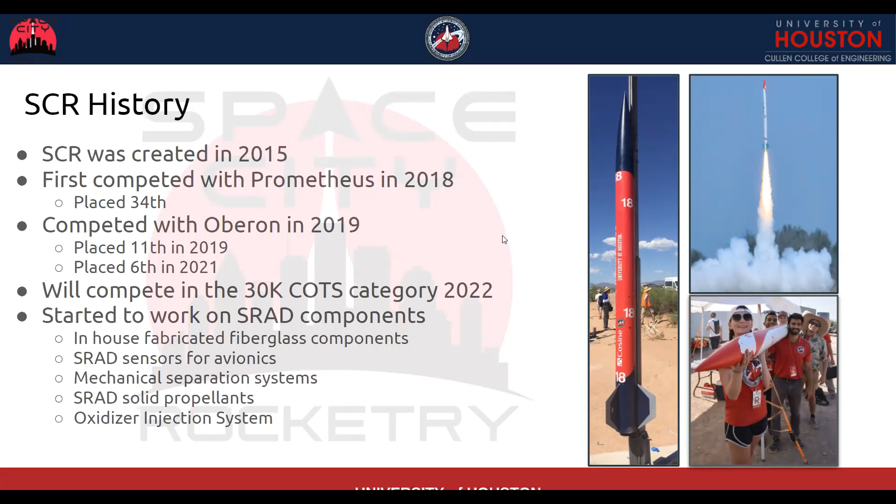Now let's move on to what the presentation is today and the things we want to achieve. First, we want to get feedback and approval from advisors like Randy and other alumni joining, to make sure we are on the right path to launch this June at Spaceport America Cup. We also want to showcase all the work and new implementations the team has had this year. There's been a lot of changes, a lot of things we've done this year that we've never done before, so we want to present that to you.

Once you see everything we've done, we want to provide some insight into where the team wants to head in the next few years and what we can accomplish, and also gain more support and expand awareness of the engineering excellence that the team provides at the University of Houston.

One thing I do want to mention is that for today, we were expecting the rocket to be around 90 to 95% completed. However, because of finals, because of many of us graduating, our report, and just the ambition of pursuing 30K in just one year, there are some notable things that have not yet been manufactured. But we do have a plan to finish them within the next week, and we'll be talking more about that.

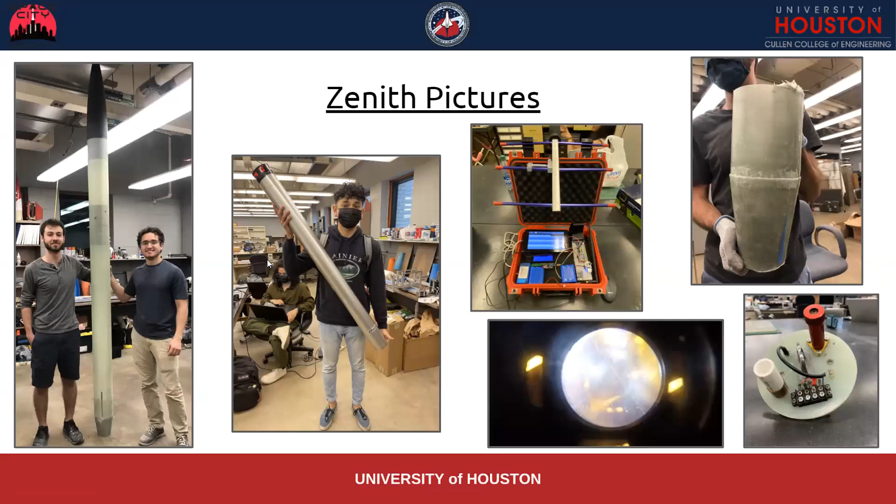And then, as you can see here, we have Zenith right now. We have already sent Zenith to IA Coatings, who are going to be doing our paint design, which you can see on this side right here. This is how we'll be looking. This is the O3400, and then you can see other components of Zenith.

I just wanted to point out that at the beginning of the year, we did not start up with a lot of money. A lot of it came out throughout the whole process of fundraising throughout the whole year. However, we have managed to stay under budget, and as you can see, some of the money we will be saving for next year.

We have this - how much Zenith is expected to cost, $5,400. Competition is going to be around $4,000. And we do, as I said, plan to save more for next year.

But okay, it is time now to go through each sub-team and be able to learn more about Zenith and everything we've done. So take it over, Ravi. Cool. Can everyone hear me okay?

We good there? Mm-hmm.

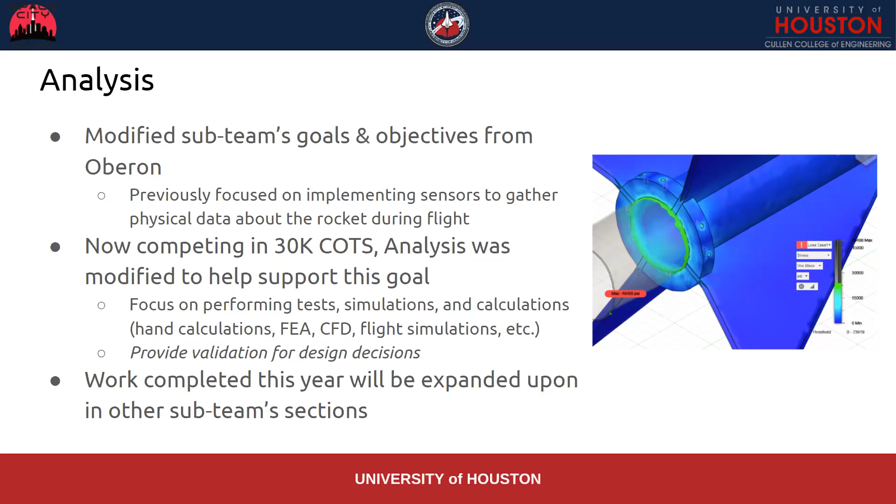So the work we've completed this year will be expanded upon in other subteam sections. I'll be checking in throughout the presentation to highlight what we've completed.

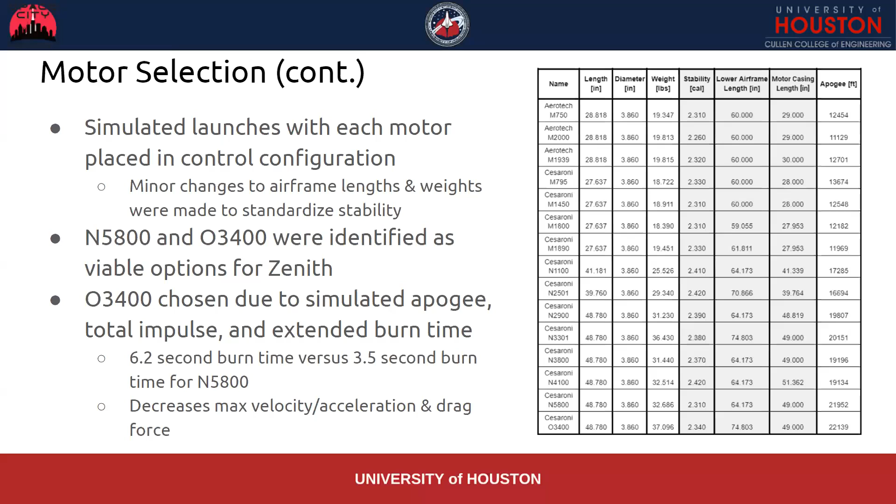And this is the Cesaroni O3400. You can see some of its dimensions here and the thrust curve. As mentioned, that burn time of 6.2 seconds is definitely one of the main reasons why we decided to go with this, and also its total impulse of 21,000.

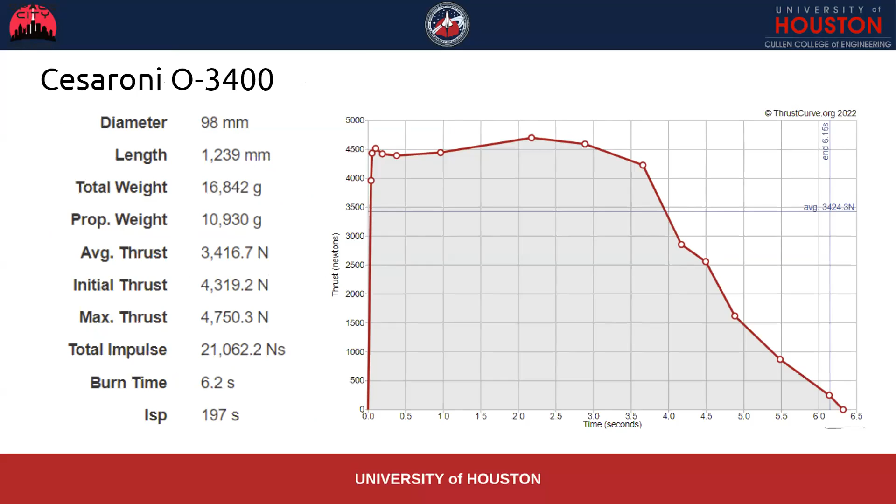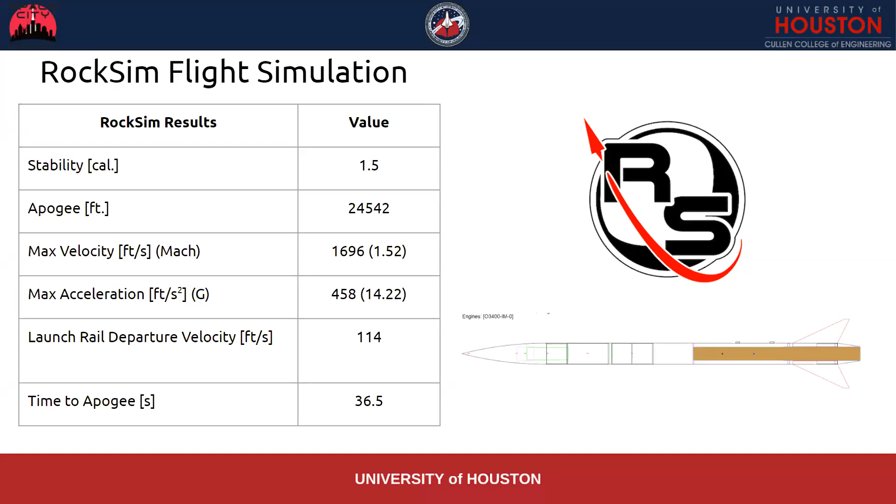Now, we also employed the use of RockSim to get some more comparable values and not solely rely on OpenRocket. The stability stayed the same at 1.5, along with its mass of 78.7 pounds. We did notice that the simulated apogee was projected to be a bit lower, around 24,500 feet. The max velocity and max acceleration were comparable, although a little lower for velocity and a little higher for acceleration. The launch rail departure velocity is still above 100 feet per second per IREC guidelines, and the time to apogee is 36.5 seconds.

So here you can see the propulsion risk, and you can see that everything is either in the yellow or the green, which means that it's all clear. We have our negligible and improbable thing being that the motor assembly is taking more time due to it being O-class. We're not actually assembling the motor ourselves since it's O-class.

We can't work on it, so I'll put that as improbable because we're not really the ones assembling that. The only seldom risk we really have is the igniter, so it's either an incorrect insertion of the igniter, which can be easily fixed, or failure to ignite the motor on the first try, which we can go again.

So the most improbable thing would be Zenith reaching Mach 3, which would have some potential deviating or unfamiliar behavior. But as you could tell from the last slide, it only goes to, I think, 1.6 Mach whenever you looked at the simulations. Also, I'd like to give credit to Ravi and Tala for all the motor selection stuff.

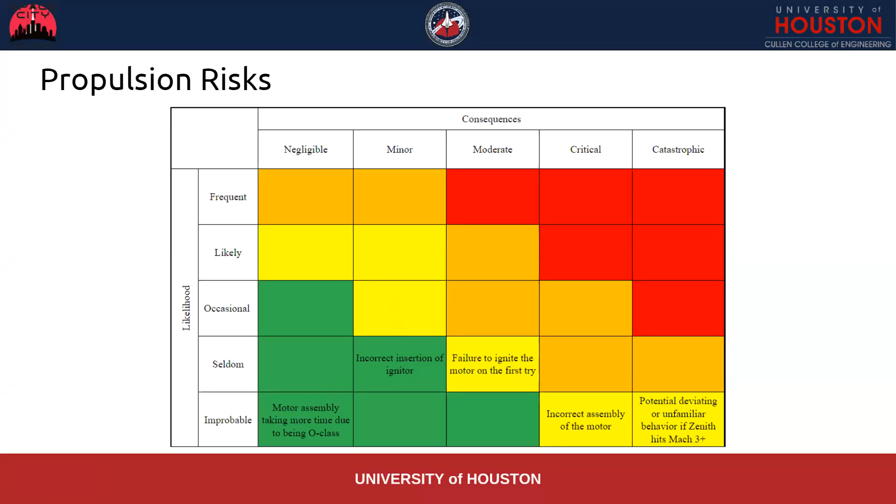They worked really hard on that during last semester. One thing I want to point out too is that for the motor assembly, something we used to do was assemble our own motor with solid propellant. However, because of the new regulations from IREC, we can no longer do that ourselves. We opted to have the company Cesaroni assemble it for us at competition.

Now it is structures. Hi everyone, my name's Haley. I'm about to be a senior in mechanical engineering, so I'll still be here next year.

Just starting off strong with the nose cone. We went with a 4-to-1 tangent ogive. The main things we considered while doing this through a trade study at the beginning of the year were the drag calculations that Analysis so graciously did for us, the price of the component, and its actual availability. We considered a lot of different options, but there were only a few that were commercially available since we weren't looking into creating our own nose cone just yet.

And this one just had comparable prices and availability to the other commercial ones. So the main difference here was the drag calculations, which I will let Ravi cover on the next slide.

Thank you, Haley. So as she mentioned, Analysis performed the analytical component of the trade study, which we determined to be a drag force data analysis, once again utilizing OpenRocket. We considered 7 total different nose cone profiles.

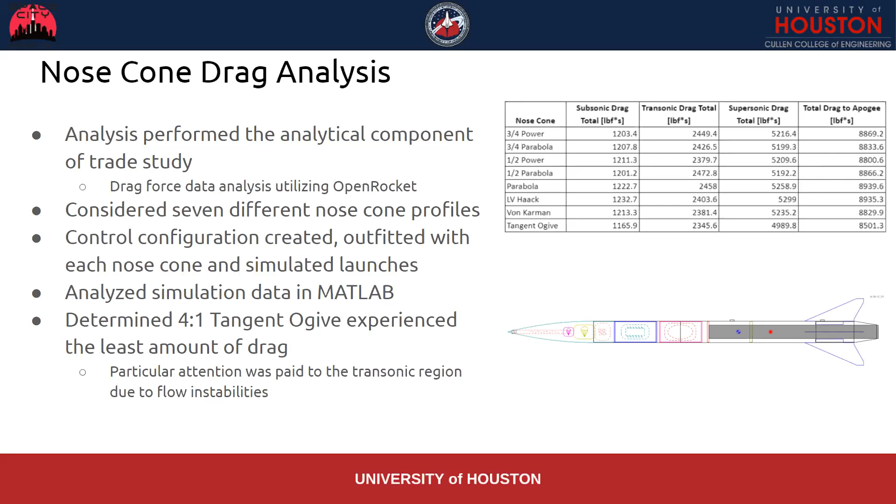So similar to the motor simulations, we created a control configuration, this time much later in the design process, so we were able to get a clearer representation of what Zenith is like today. But we outfitted each of these control configs with a different nose cone and then simulated their launch.

Instead of just comparing apogee as we did with the motors, we were able to analyze the simulation data from OpenRocket in MATLAB, and we were able to obtain drag values for each nose cone experienced in the subsonic, transonic, and supersonic regions, as well as accumulating all of the total drag to apogee.

I do want to note that particular attention was paid to the transonic region due to flow instabilities, and that led us to determining the 4-to-1 tangent ogive to be the nose cone profile best fit for Zenith.

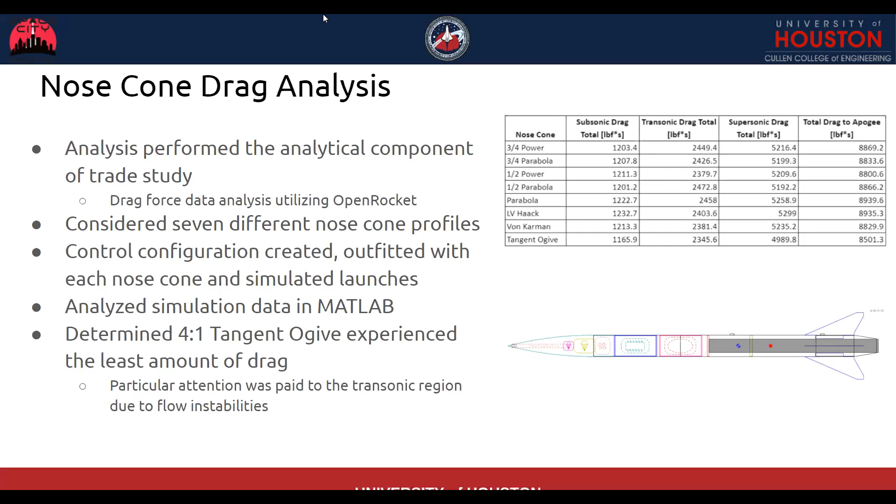So as far as the airframes and couplers, after playing around with different OpenRocket simulations, we decided to shorten the upper airframe that we had originally purchased. That was shortened down to 25 inches. This just allowed the payload and the avionics bay to sit in a preferable area in terms of distance from the motor, so we could hopefully play with our stability a little more.

And then as far as the— can y'all hear me now? Yeah, we can hear you. Sorry, my mic's honestly pretty bad, so let me know if I end up going out again.

So as far as the airframes go, the upper airframe was shortened just to make the payload and avionics bay closer to the motor, just so that would help our stability a bit more.

The avionics bay is above the payload bay just because the recovery system is kept in the nose cone. So it's preferable to have the avionics system be directly in contact with that, as opposed to going through the payload bay if it were to be in between them. So that was a determination for that.

The bays were both used in Oberon, so they did have previous holes in them. We decided to patch all the holes in the avionics bay just to strengthen it up a little bit. We used some reinforced epoxy for that, and we also did an inner layup to add some even more strength to it. Then we added some flange nuts on the backs of all of them, just so the epoxy would have something to grab on.

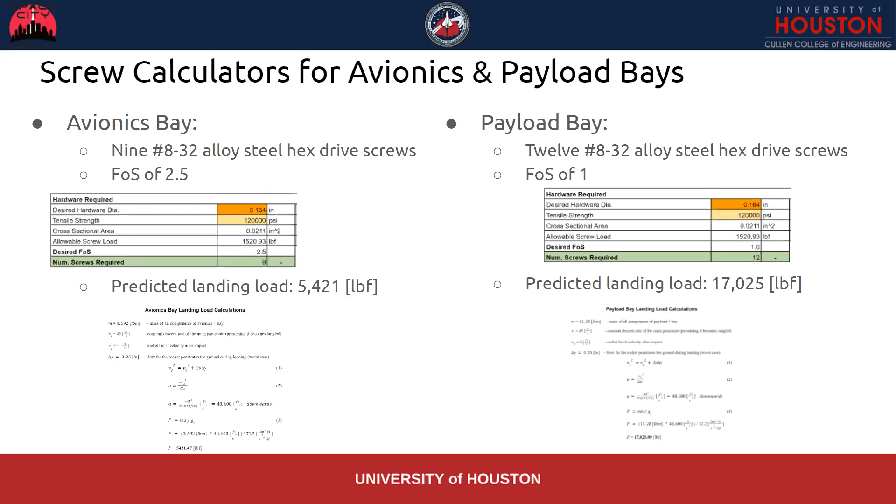The motor block was an addition we made this year since we are securing the motor from the top, as opposed to securing it at the bottom the way Oberon was done. Essentially we'll have this motor block sitting above the motor, screwing in with a countersunk screw into the top of it, and it will be secured with 6 6-32 screws.

It was determined that we wanted to go with aluminum 6061 T6. Shout out to Eason for machining that for us. During machining, it did turn out that we had an issue with tapping one of the screw holes. That one's actually an 8-32 screw, but it is still usable.

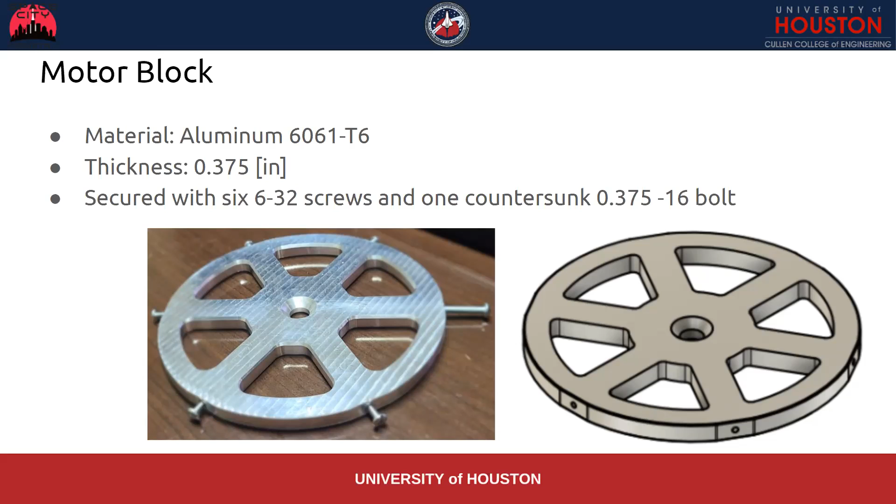And the design was also created by Eason, and it was manufactured earlier in January.

The boat tail has been one of our big proud moments for structures this year. Originally we were thinking that we were not going to get very high on apogee, and so we were trying to find new solutions. So for the boat tail, we ended up playing around with different things that we could do to improve apogee because we were worried we weren't going to get very high. This ended up adding a lot for us.

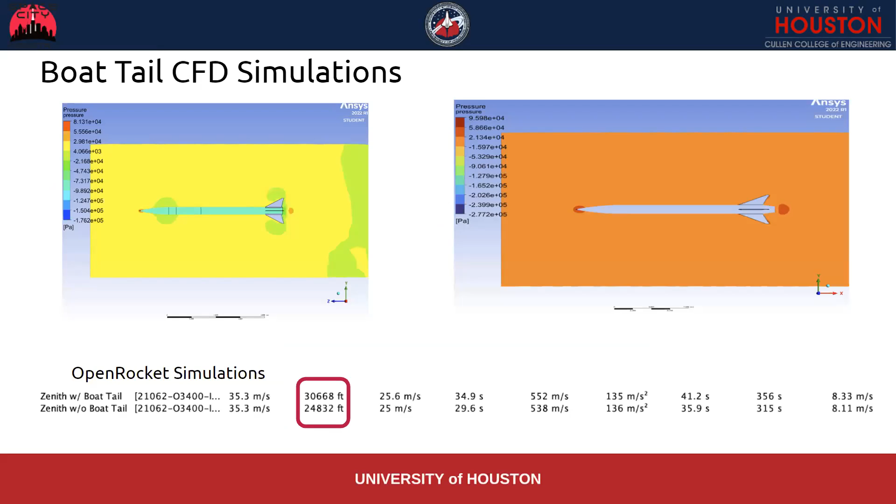So this is just kind of verification of the improvement that we got from Zenith with and without the boat tail, as you can see. This was just validation for the previous apogee and the current now estimated.

So I just wanted to talk a little bit about the boat tail process, just to discuss some of the things that we discovered.

We tried out different methods of securing and tried to find sources online. We determined that PVA and mold release were the best forms to actually work with. We ended up using 3D prints, two half prints. For the lip, we ended up using reinforced epoxy with graphene and chopped fibers to try and get a really clean lip on there. And then we just layered over with fiberglass sheets on top of that.

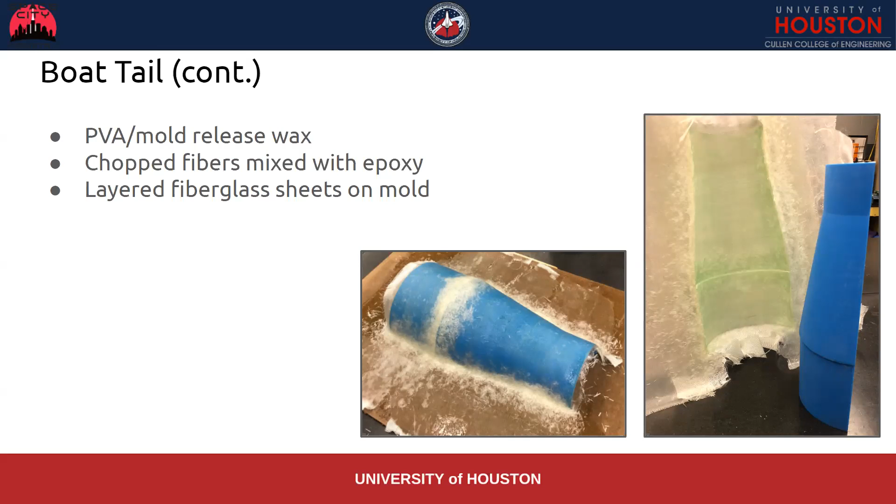By doing that, we ended up producing these two lovely negatives right here. We actually ended up having to do this process twice just so we could perfect it, whether a heat gun helped, or how many layers we needed to make it strong enough. Once we had these two negatives, we were able to do the same process of doing the chopped fibers along the lip, as well as doing the inner layup after we had used the molds, screwing into the sides to keep them aligned, so we didn't have an issue with the lip not lining up for both of them.

Another thing we are working on is the MLA. We have all of the parts for this, but it has not been assembled yet. As far as the layup process, it's going to be the exact same as the boat tail process, so we're very confident we can get it done effectively in one try, especially since carbon fiber is a much more expensive material.

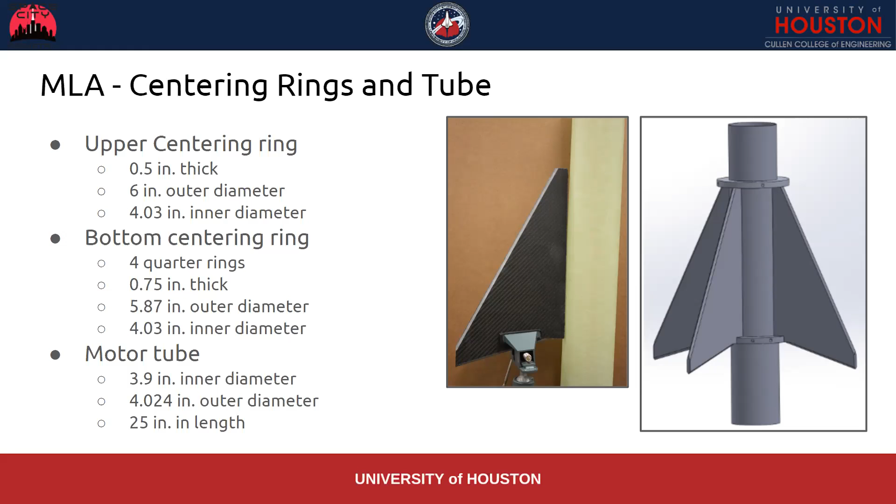Analysis was also employed using a screw calculator to determine how many screws will be necessary for the modular lower assembly. In the end, we determined we need a total of 12 1/4 inch-20 alloy steel hex drive screws. We also determined that 8 screws should be placed on the lower centering ring, which is divided into 4 quarters, and 4 screws used on the upper centering ring. This was determined with a factor of safety of 1.41, and the predicted landing load was made with the same assumptions as the avionics and payload bays.

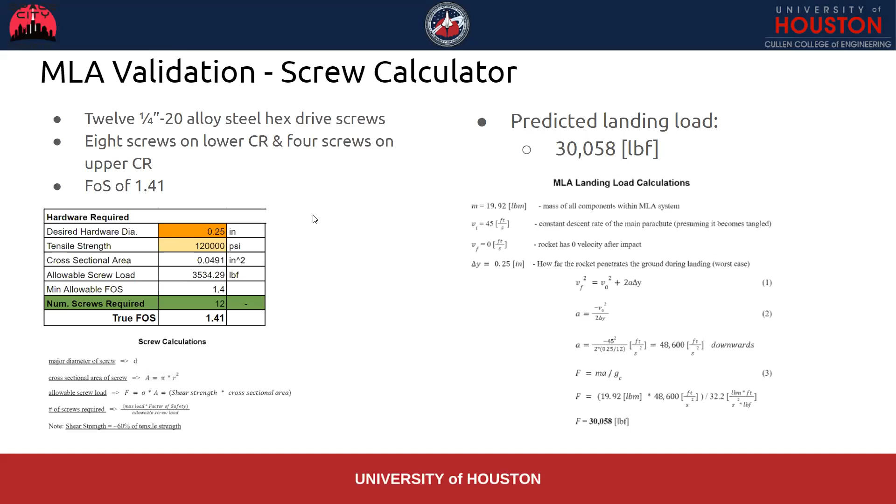Something I forgot to mention is that we assumed a worst case scenario, as if Zenith was landing like a pencil straight down. Since the MLA will be the first point of contact if that scenario happens, that gives us this extremely large predicted landing load of 30,000 pounds force. But these 12 screws, according to our screw calculator, will be able to hold up against those projected forces.

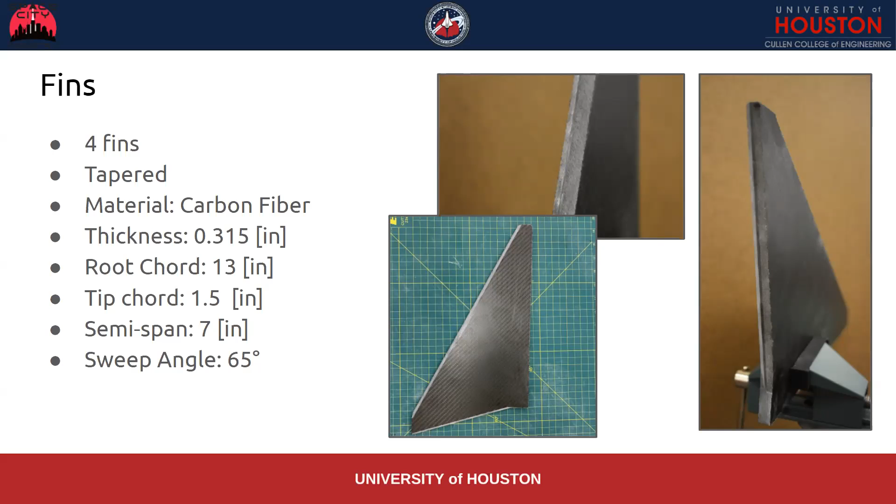We also went with a tapered edge to help us with the drag. There was an issue during machining with one of the tapered edges, so we've been working on cleaning that up using some chopped fibers and epoxy, trying to get a straight edge so we can get a comparable match with the other fins. These will also be attached - that straight line on the edge will also be attached to the MLA.

As important as ever, we wanted to make sure our fins would not flutter or diverge. To do this, we utilized the program AeroFinSim for these calculations. Instead of assuming the regular carbon fiber input it has listed as a material on the program, we were able to gather material properties of the carbon fiber from the vendor and use those for a much more accurate representation.

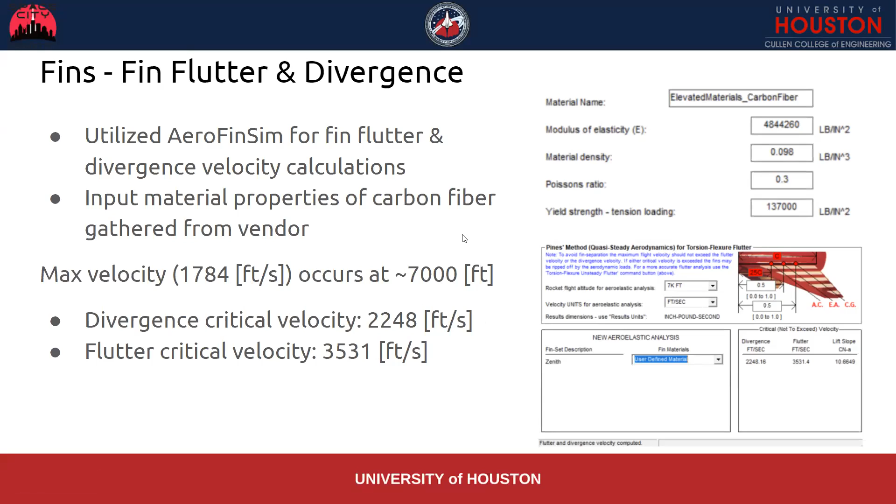I want to note that our max velocity of Zenith is projected to be around 1,784 feet per second, occurring at roughly 7,000 feet. This is in line with the critical velocities for both divergence and flutter, which are listed at around 2,200 and 3,500 feet per second. So we are clear on those with the fins.

As far as risks, part of the main concern was the actual landing forces, but also the forces experienced during flight. Right now our most critical concerns would be failure of the rail buttons, the motor block, or fin flutter or divergence. Failure of rail buttons coming off the pad would be very dangerous, as we would have no real direction or control of the direction.

If the motor block fails, we have an entire motor falling out the back of the rocket - probably not ideal. Fin flutter and divergence, as Robbie was saying, is a very critical point and can completely mess with the direction, the apogee, really anything about the flight.

Something we considered critical but also improbable was fastener hardware failure or improperly mounted fins. This isn't an assumption that the fin is going to fly off the rocket, but instead an assumption that maybe they are epoxied too crooked, in which case it may cause some sort of spin or mess with the flight.

For fastener hardware failure, that also applies more so to the landing forces, and that's where we're expecting to see the most forces. So the hope is that it would still be reflyable after, and that it would be something critical but not completely catastrophic.

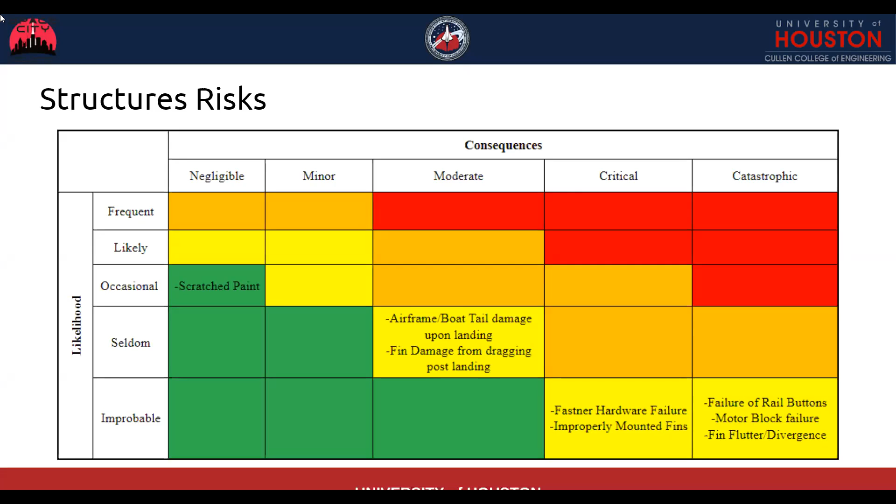Thank you, Haley. One thing I want to clarify is you might be asking why we don't have a thrust plate. The MLA serves as our thrust plate this year, taking on all the load from the motor. The reason is we weren't comfortable having a thrust plate in our boat tail, which we just started working on this year, taking all that load. That's why we went above and beyond on choosing screw size, the thickness of the MLA, and so on. If you have more questions, we'll answer them after the presentation. But now let's move on to payload.

Hi everyone, I'm Isabel. I'm a junior majoring in biology and environmental science, and I'm your payload lead. Our overall objective of Zenith's payload is to observe how accelerative and gravitational forces, as well as the pressures of spaceflight, affect E. coli and their reproductive behaviors.

We're trying to answer two major questions: how do the pressures and accelerative forces of spaceflight affect the reproduction and growth of E. coli? Our null hypothesis, the expected hypothesis within the scientific method, is the opposite of what we're asking: the internal pressures throughout Zenith's launch will not affect the reproductive behaviors. Our alternative hypothesis, which we are trying to figure out, is that the internal pressures throughout Zenith's launch will affect the reproductive behaviors of E. coli. These hypotheses are important, as we'll analyze them later when we get our results.

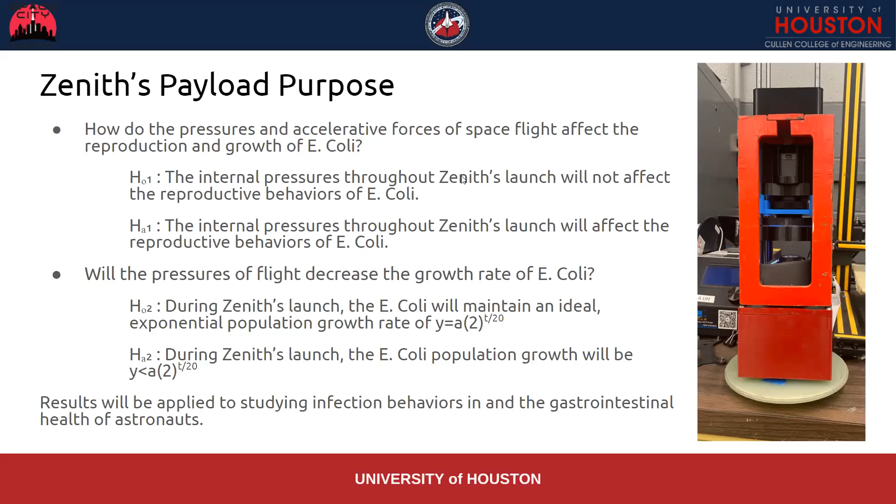Our second question is, will the pressures of flight decrease the growth rate of E. coli? Our null hypothesis states that during Zenith's launch, the E. coli will maintain an ideal exponential population growth rate of y equals A times 2 to the power of t over 20, which I calculated because E. coli doubles every 20 minutes. So 2 is our growth rate, and time in minutes is divided by 20 — we can also convert that to seconds if needed — and A is the initial amount of E. coli we start with. Our alternative hypothesis is that the population growth would be less than that, as it would decrease due to pressures. Our results will be applied to studying infection behaviors and the gastrointestinal health of astronauts, as E. coli is found in the intestines, which I'll elaborate on in the next slide.

So E. coli stands for Escherichia coli. There are different classes of it; however, the two main ones we looked at when choosing a strain were commensal E. coli and UPEC, which is uropathogenic. Uropathogenic causes a lot of common infections within humans. So although we're using commensal E. coli, the more harmless one, in case of bacterial contamination there are no major infections caused.

If this strain theoretically were to mate with other strains, that would cause infections, so we would be able to see how the bad E. coli can cause incubation periods with changes in pressure during spaceflight. And we would also see how commensal E. coli grows and takes up resources within the gut microbiome as the pressures change.

It reproduces at fast rates — like I said, it doubles every 20 minutes during the exponential phase. The chart on the right is an averaged growth curve of all bacteria, and it's pretty accurate to E. coli. There's a lag phase for the first hour and a half, then a few hours of the exponential phase, and then the stationary phase, when growth dies off because they take up too many resources to grow further. That protects us from other bacteria trying to cause infections. It's also not oxygen dependent and is temperature resistant.

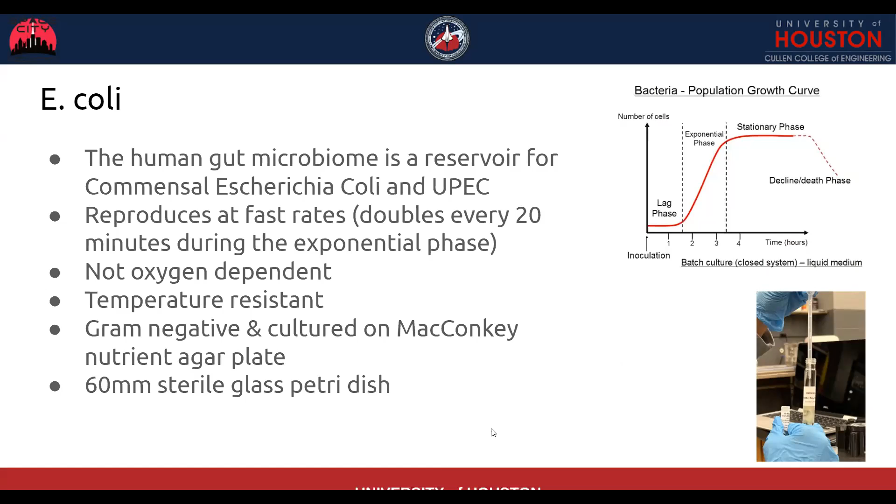For our camera, we're using the GoPro Hero 5 Session. Our ideal recording is 1080p at 60 frames per second. The sensor size is 1/2.3 inches, and the aperture is f/2.8.

Our main concern with the GoPro was overheating. As it overheats, it could die faster, it could skip around, it could crash. To mitigate that, we have a power bank that'll be hooked up to give extra battery life, and then heat mitigation, which will be explained in our cooling system later.

When it comes to our magnification system, we mimic a traditional microscope model. So we stack the lenses at certain apertures, focal points, and measure the refractions of everything. We do a 10 times magnification macro lens with a 40 times magnifying glass to reach 400 times magnification.

The way it's set up is our light source is on the bottom, then our Petri dish, and the light source goes to the Petri dish, and then the lenses are stacked and the camera sees through those. Our light source beneath the Petri dish is at an angle giving alpha equals 30 degrees, which will be used in the numerical aperture of the lenses. In the next slide, I'll elaborate more.

The numerical aperture of our bottom lens can be calculated by doing n times the sine of alpha. The sine of alpha would be 1/2. And n, our refractive index of agarose, was measured by taking the sugar and salt contents and measuring the percentage of that against the water in our agarose, which gives us n equals 1.335. We multiply that by 1/2, and that gives us our numerical aperture of our bottom lens, which is 0.6675.

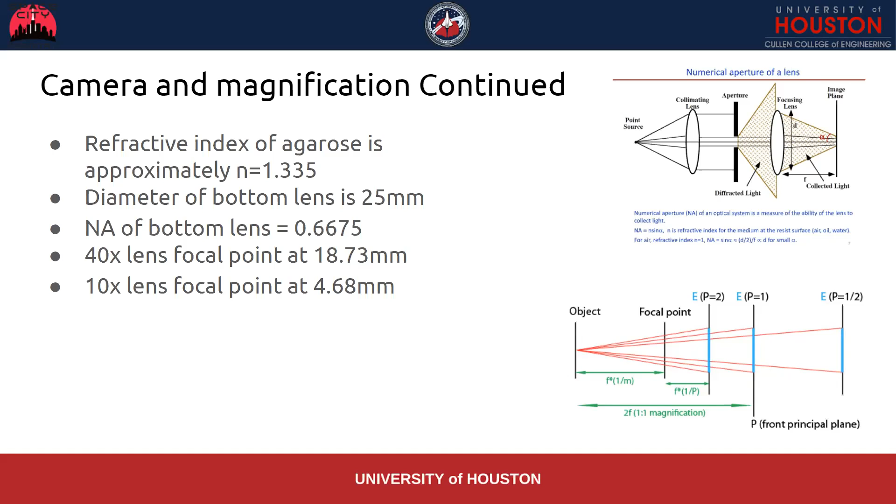As it states, the numerical aperture is equal to the diameter of the bottom lens divided by 2, divided by our focal length at the bottom. The diameter of the lens is 25 millimeters, which comes down to 12.5. We use that to figure out the focal point of the 40 times lens at the bottom, which is 18.73. Then the second figure on the right shows how we proportion that to get our 10 times focal length of 4.68 millimeters. That's how we will stack the lenses at those distances.

For our structural components, we have the CubeSat of 10 centimeters, 10 centimeters, 10 centimeters, 30 centimeters. It'll weigh 8.8 pounds. We have our ballast, and our stabilizers, which are rubber washers and rubber grommets between a lot of our hard equipment, and then foam to dampen more vibrations.

We have our steel frame. The steel gives structural integrity and dissipates heat from the inside, acting as a heat sink to further take away heat from the GoPro. Then we have our 4 zinc rods that are 1/4 by 20 that run through the payload bay that everything is secured on. And then our headlamp sits at the bottom.

Within the steel frame lies the spacers that are cut to the focal lengths that we wanted. And then our mounts holding all the components, we refer to this as the internal frame. The mounts and spacers are printed out of standard PLA.

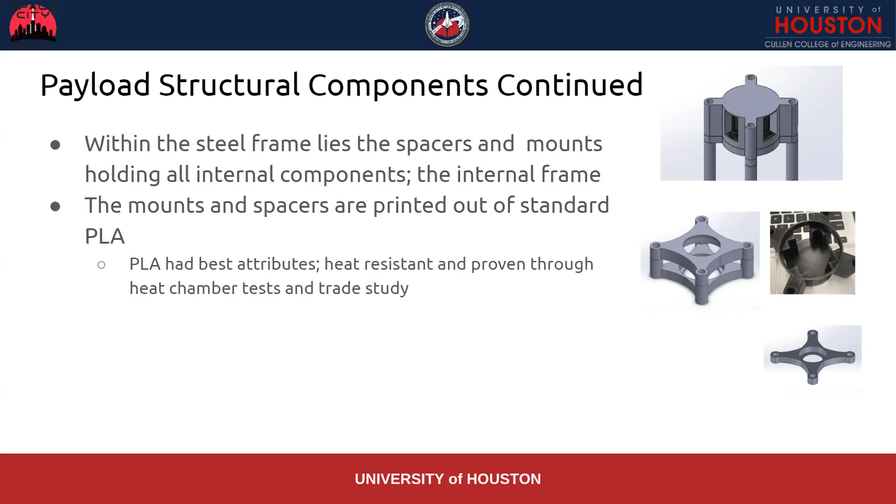There was cause for concern that the heat could mess with the structural integrity of our mounts. However, after doing a trade study on 5 other 3D printing filaments and a series of heat chamber tests that went up to 200 degrees Fahrenheit, we concluded that PLA had the best attributes and was the most available. It's only going to get up to like 115 at the most extreme in New Mexico, so we should be okay.

For our payload cooling system, our purpose was to prevent overheating of the camera and the power bank. So what we're doing is taking instant ice packs, which is ammonium nitrate and purified water. When that salt is dissolved in that water, it creates an endothermic reaction, which makes it cold. It sucks in all the heat.

So it'll fit within the X's on the right. Those are each calculated to be 36.823 cubic inches.

As we tested it in the heat chamber, they could stay cold for up to 5 hours. That thermometer on the right measured it after coming out of the heat chamber for a good 30 minutes, and it was still cold.

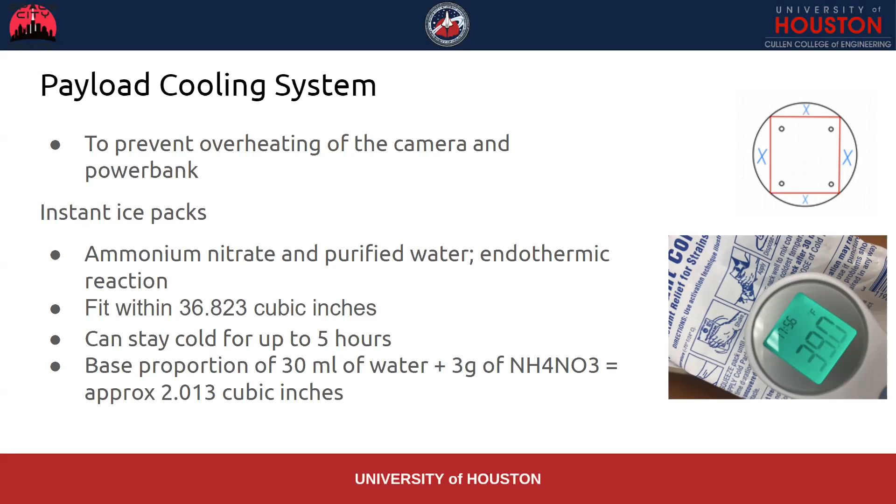I have a base proportion of 30 milliliters of water plus 3 grams of ammonium nitrate, and that approximates about 2 cubic inches, and we can mess with that proportion to create stronger solutions, and then also to fill in the other cubic inches. We also have space above the payload frame to add an extra cooler to keep the GoPro cold. And as the solution is shaken more and mixed, it will become colder, so the vibrations within the rocket will hopefully maintain the coldness.

And then for our expected results, it's inferred that the reproductive behaviors will be affected. What we plan to do is compare the recorded footage against the pressures measured by avionics. As we calculate the surface area across each frame per cubic millimeter, we can create and simulate an observed growth curve using statistical code on RStudio.

As we do that, we will compare our observed and our expected values with a chi-square goodness of fit test. As you compare those, you'll get a p-value. If the p-value is less than our critical value chosen of 0.05, we can reject the null hypothesis, meaning that we are correct and it does affect reproductive behaviors, and it also decreases the growth curve. And if it is over 0.05, then we fail to reject that, meaning that our experiment could be inconclusive. So this is just a way to further confirm that we got accurate information.

So for our payload risks, we kind of went with anything and everything that could happen and go wrong, just because we didn't have it in the PDR. But for negligible and improbable, we had condensation over the Petri dish and the camera lens, which we will be spraying everything with hydrophobic spray as much as we can so that the condensation will dissipate from that. And if it does happen, it will not affect our data collection too much.

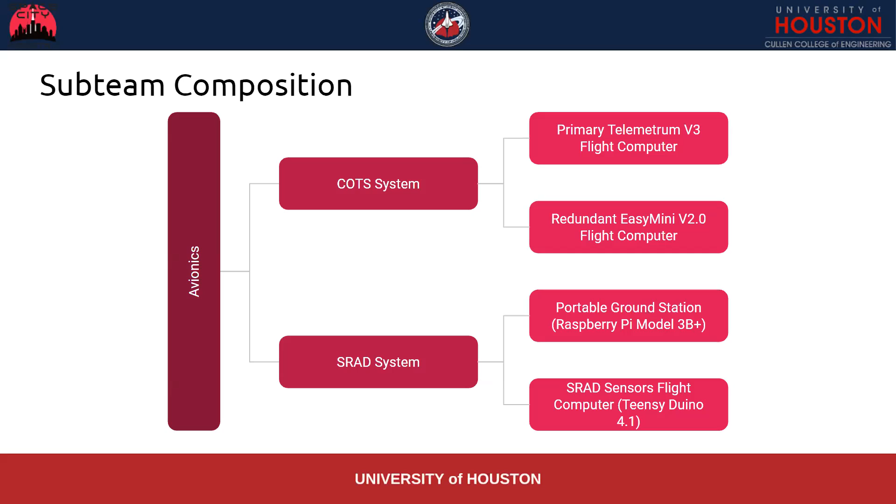So moving on to the next slide, we have COTS avionics. So first up is our COTS flight computers. Just to give a quick rundown before I go more in depth, we're employing two COTS flight computers this year for Zenith.

Our primary flight computer is a Telemetrum version 3, as I discussed earlier, in which the charges it will release on its main and apogee terminals are the tender descenders at 1,000 feet and CD3CO2 system charges at the drogue. And it has a built-in GPS sensor to track and recover the rocket, as I will talk about later. It's currently powered by a 3.7 volt, 25 milliamp per hour LiPo battery.

And as for our backup redundant flight computer, we have, as you can see here on the right, the EasyMini version 2.0. It currently ignites the black powder charges as a backup charge to ignite at apogee with a 1-second delay. It also releases tender descenders at around 800 feet, as I'll discuss later why we chose that altitude.

It's also powered by a 3.7 volt, 25 milliamp per hour LiPo battery, and both flight computers have general sensor data. So they output pressure, altitude, temperature, speed, velocity, and acceleration data.

So on the next slide, to go into more depth into our primary flight computer, it's a Telemetrum V3.0. It has dual deployment support with microsensors, so it has onboard non-volatile memory.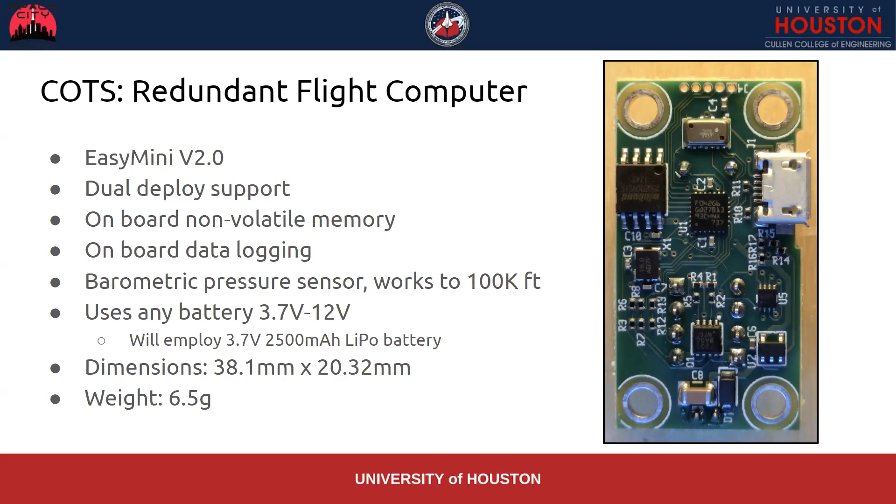On the next slide, you can see on the left our wiring schematics, showing how exactly we connect our charges to the E-matches, how we connect it to the terminal blocks, and eventually to our pigtail connectors. On the right is our almost finished full avionics tray.

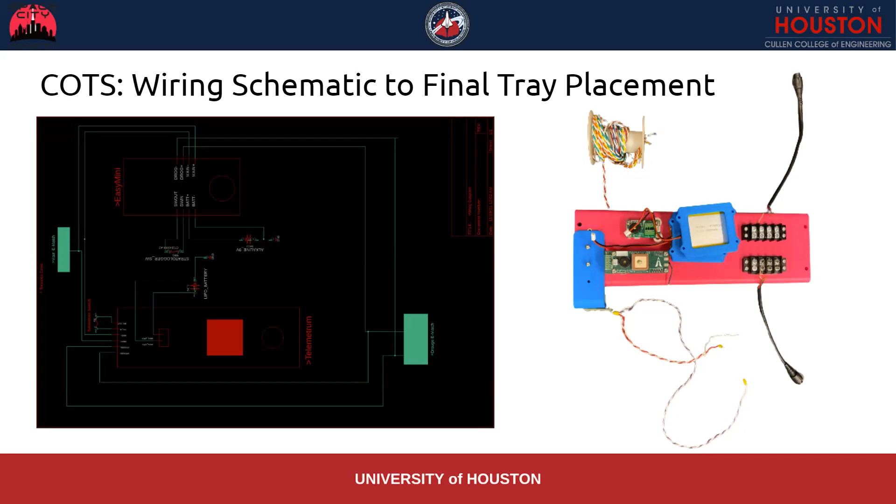While we still haven't worked out some kinks with the battery holders and the LiPo batteries, we are very confident we'll get the screw terminals and all the brass inserts completely finished and screwed in right before launch. Should take about a couple of days or so. But other than that, pretty much our avionics tray is finished, and we'll go into more depth in the next few slides about it.

With our avionics tray design, we have a 12-inch coupler with an 11-inch length tray. The way we designed our tray this year is that we have a COTS system on the front, and any SRAD components that go directly on the rocket will be attached on the back of the tray.

The tray is held by a bulkhead with 2 threaded rods that go through the ends of the tray. It also has 2 pigtail connectors on the bulkhead, and 2 terminal blocks, 4x2s. These terminal blocks help connect our charges and igniters directly from our flight computers all the way to the charges themselves.

On our last slide we had an orange tray, which is our prototype tray to mess around and figure out exactly how we want to place our components. This time we redesigned our tray, as you can see on the pink tray to the right, which has our COTS components, including 2 4x2 black screw terminal blocks, 2 stacked battery holders which will hold our LiPo batteries, a screw switch holder, and 3x4x5 millimeter brass inserts with M3 screws for any holes to holster all our components.

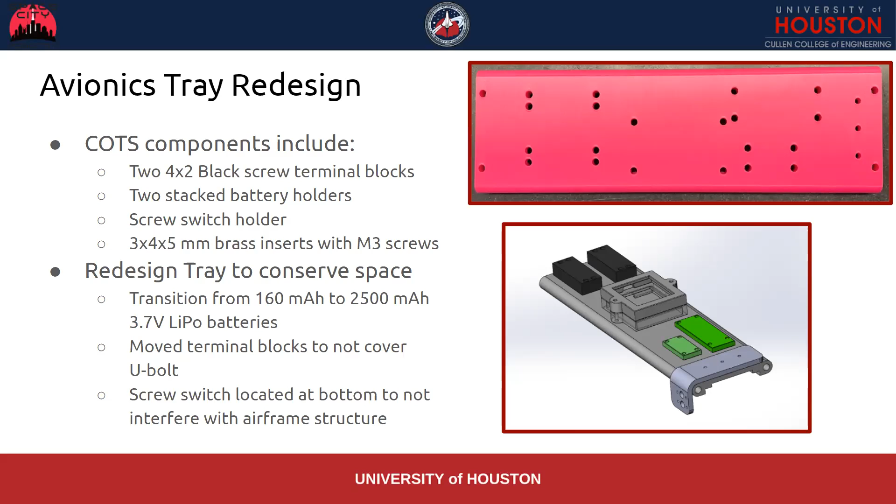The screw switch is located at the bottom this year to not interfere with the airframe structure, as the way the airframe is cut would interfere with the cuts if we were to place a screw switch in the middle of the tray. So we opted this year to put it at the bottom.

As for planned tests this year, avionics testing, we performed two main tests. Our first test was pressure testing. For the COTS system, avionics performed 3 pressure tests to gauge capability and performance of the primary and redundant altimeters, and also test out their Kalman filters and how that algorithm works. The way pressure testing worked is that we placed the altimeters in a vacuum-lube-sealed pressure chamber, and we pressurized the chamber from 14.9 psi to around 4.8 psi.

And then eventually we depressurized the chamber back to ground level air pressure. The way this works, as you can see here on the chart to the left, is that pressure mimics the altitudes of going from 0 to 30K feet. Ultimately, the way we want this pressure testing to work is that we want to test out the ignition of the drogue and main terminals of both the primary and the redundant flight computers with Christmas lights and LEDs.

So the way it works is that once it hits a certain pressure, if it detects apogee, the lights will light up, signifying that the charges have been ignited and that is igniting at the correct altitudes. For the redundant altimeter, there are 1 to 2 second delays for both the main and the drogue/apogee ignitions, to ensure redundancy and also to ensure it doesn't ignite at the same time as the primary flight computer.

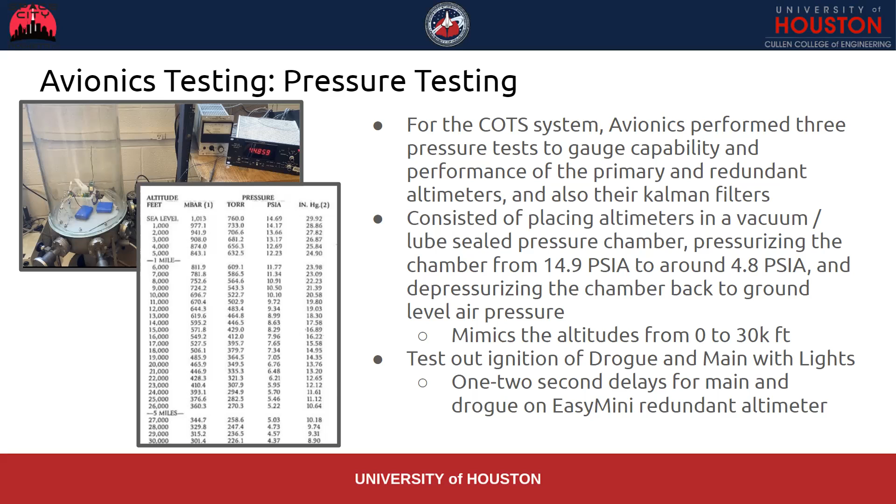So on the next slide, we have our pressure testing results. You can see here from left to right, we performed 3 pressure tests total. However, the first 2 failed as the pressure chamber had manufacturing defects and depressurized too quickly and just had a lot of issues. However, this result you see here is from our 3rd pressure test, which was successful.

You can see here on the left and the right, our pressure testing reached an apogee for both flight computers at around 29.5K feet, which is a little higher than our initial apogee. However, it's the best result we could get. As you can see here, the data seems to be nominal.

The only difference is that the temperature for the EasyMini seems to be differing with the temperature on the TeleMetrum by around 10 degrees Fahrenheit. Because of that, we opted to use an SRAD temperature sensor, as we'll talk about later, in order to provide data validation and get more accurate results.

So you can see here on the next slide, the pressure sensors, just average data for the pressure sensors for both flight computers, and average data for the temperature sensors of both flight computers. On the left, the pressure versus time graph seems to be nominal and seems to have a smooth curve. So what that tells us is that our Kalman filter is working properly, ensuring a smooth curve and getting rid of any inaccurate data and errors.

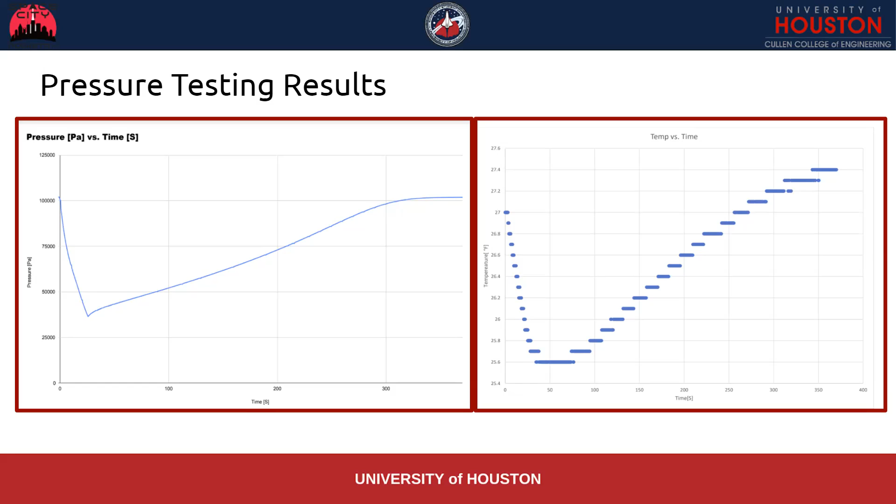However, on our right, our temperature and time data seems to be rather skewed and rather just straight, and does not update correctly. It only reads data up to about 0.1 decimal places correctly, which isn't the best data for us to use. So that's why we opted to use a more accurate and refined SRAD temperature sensor, as we'll talk about later, in order to provide data validation and get more accurate temperature results.

So on the next slide, to go into more depth of how apogee and main release work: both altimeters read apogee at exactly the same time. There was only a difference of around 20 to 30 feet, or about 9 to 10 meters, which is pretty accurate for both sensors.

The redundant altimeter releases drogue and apogee 1 second later after it reads apogee in order to provide redundancy. So both flight computers read apogee at the same time. However, the EasyMini reads the apogee, waits 1 second, and then releases the ignitions for the parachutes.

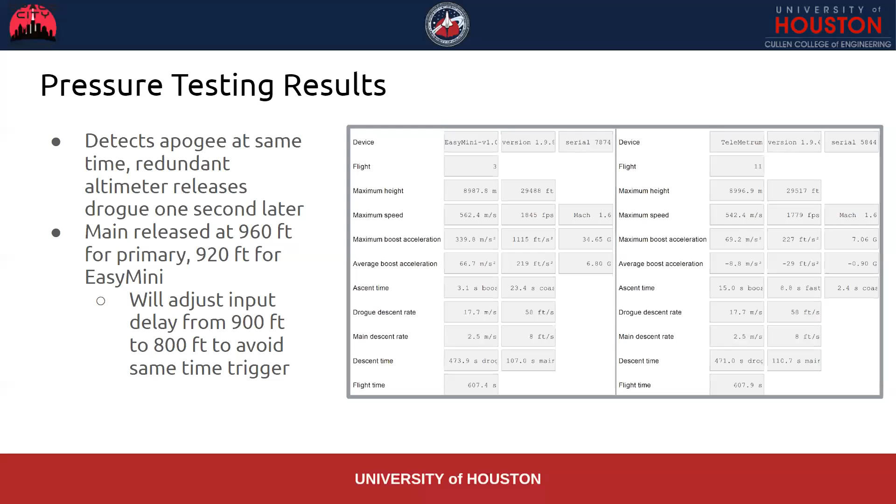And as for the main terminal for the TeleMetrum, it released at 960 feet for the primary, and then 920 feet for the EasyMini. However, these seemed to be really close ignitions and could be really dangerous in making sure they wouldn't ignite at the same time. So we adjusted the input delays from 900 feet to 800 feet to avoid a same-time trigger.

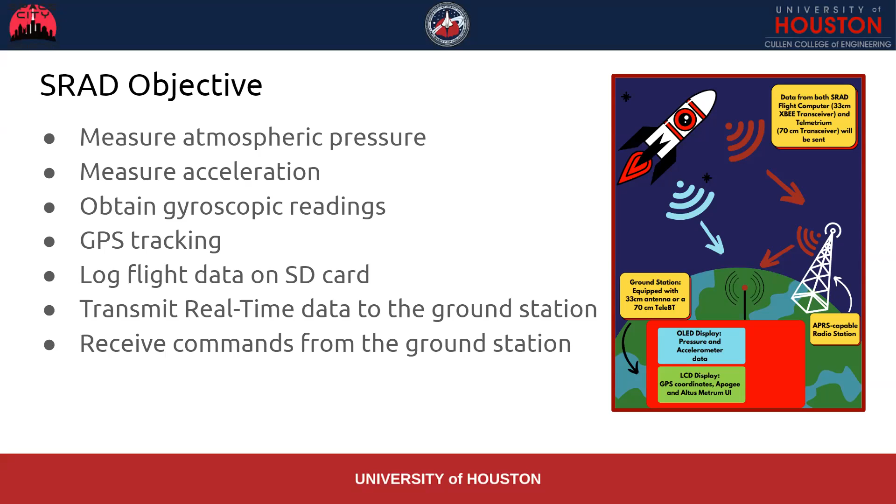Please note that the SRAD flight computer is completely isolated from the rest, and it will not be connected to ignition or separation charges per IREC rules.

Next slide. The flight computer Teensy 4.1 is our tertiary flight computer. It has a CPU power of 600 megahertz. It was selected due to its size, versatility, and has a built-in memory storage.

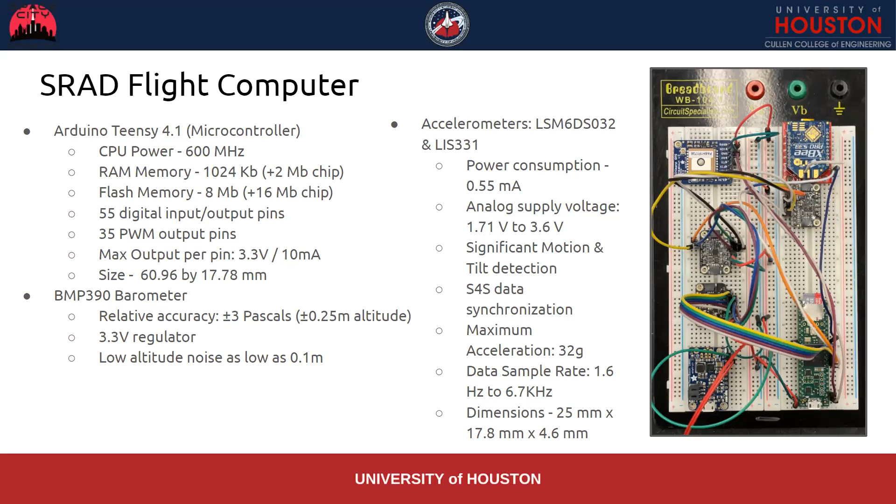The barometer was selected because it can be used in either I2C and SPI configuration. It has a 3.3 volt regulator, and it can be used with a 3 volt or 5 volt logic microcontroller. The accelerometers were selected because they have a low power consumption, and can be used in either SPI or I2C.

Next, please. The GPS breakout was selected because it has built-in data logging, RTC battery included, ensures real-time tracking, and it's basically our redundant GPS.

We did testing on the GPS breakout on campus. We confirmed that 3 or more satellites could be logged on by the telemetrum. We did this and ensured by moving the device around to make sure that it did not cause the lock to break.

The XBee is a device used to transmit data in real time. It works alongside the Yagi antenna.

All right, the ground station. The ground station focuses on data collection. It reads off and receives data. So it's designed to interface with the COTS and SRAD system on the rocket.

It operates on a Raspberry Pi. It has a touchscreen display, and we installed AltOS. It's powered by a LiPo battery, which is capable of operating for several hours. We also added a toggle switch wire to conserve power consumption.

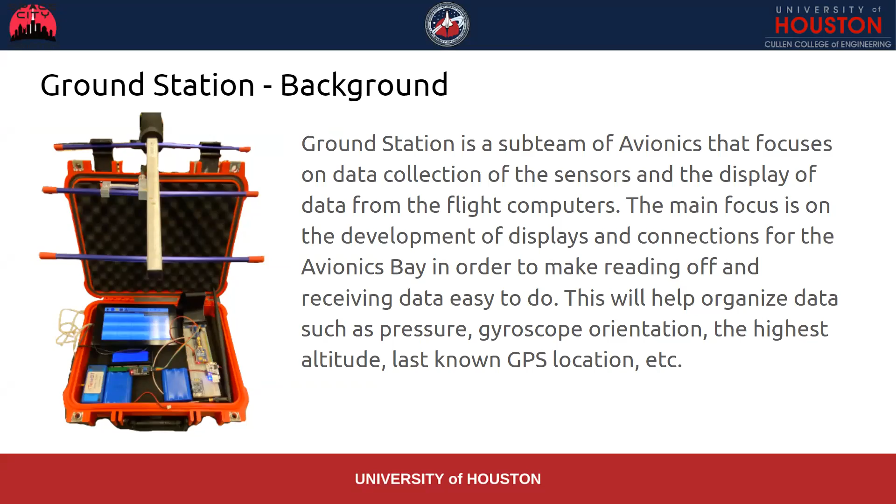Next slide, please. The Raspberry Pi 3 has 4 USB ports. We made sure that it was going to be able to operate in the average environment that we expect to see in Arizona, that is, an operating temperature between 0 to 50 degrees Celsius.

We downloaded Raspbian OS, which is a Linux distro, onto the SD card. Prior to this, we tried to download Ubuntu, which is another Linux distro. However, it was giving us error issues. Because of this, we decided to change to Raspbian, which gave us easier access to AltOS.

It also has external USB ports, which allow for easier access to charge the battery or adding an external battery pack to increase runtime.

The ground station display is a 7-inch touchscreen, Raspberry Pi supported. It has screen dimensions of 194 by 110 by 20 millimeters and a screen resolution of 800 by 480 pixels.

The reason we selected the screen was because of its ease of navigation between screens. We also selected it because it has no need for a physical keyboard or mouse. Its colorful display helps us utilize the gyroscopic data sent from the flight computer to show a 3D model of the orientation of the rocket in real time, as the rocket is in flight mode.

Next slide. Okay, the ground station telemetry system uses APRS, which is a ham radio feature that shares GPS location.

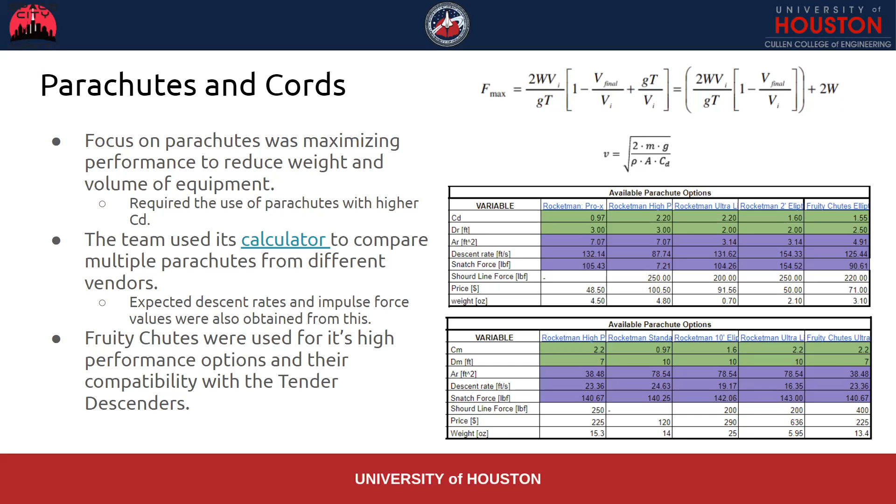So for the drogue parachute, it is deploying 1 second after apogee, and we are meeting the IREC guideline of having a descent rate between 75 to 150 feet per second. Our expected descent rate at apogee is 125.44 feet per second, which will slow down as we get closer to the ground. The impulse force for this is 41.25 pounds.

The parameters we used for the calculator were a deployment velocity of 36.21 feet per second, assuming a 1.5 second free fall and an inflation time of 2 seconds. Upon doing research, we found that if you are falling at terminal velocity, it takes around 2 seconds for the parachute to open, so that's why we went with a 2-second inflation time.

For the main parachute, we are deploying at or near 1,000 feet above ground level. Same thing, we made sure we were meeting the IREC guidelines of having a descent rate less than 30 feet per second. Our estimated descent rate for the main is 23.36 feet per second. Our impulse force for this is 276.17 pounds. This is assuming we are deploying at 125 feet per second, which is the drogue descent rate, and a worst case inflation time of 2 seconds.

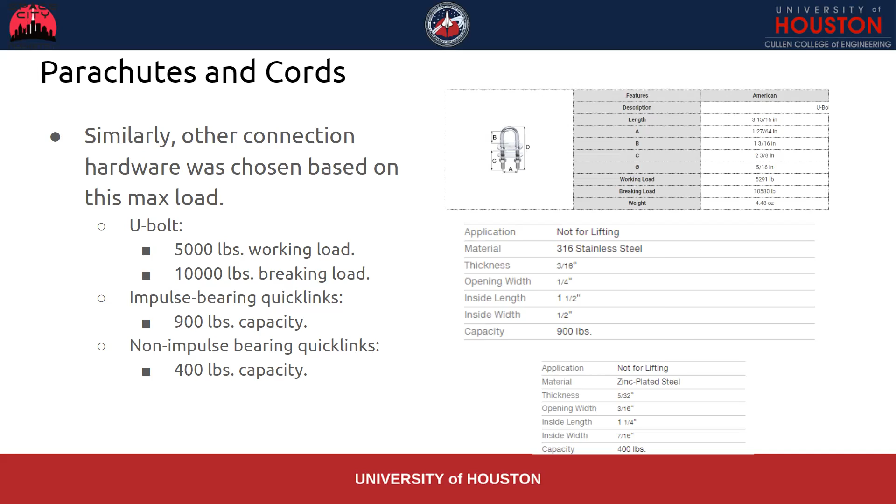Now our primary ejection system, to attach the nose cone and the upper airframe, uses 3 4-40 shear pins. Each requires 40 pounds of break force, so using 3 of them that's 120 pounds. We're providing an additional 10 pounds to ensure they break, bringing our total separation force to 150 pounds.

The CD3 works by keeping a small amount of black powder in a pressurized chamber connected to an E-match that's connected to the flight computer. Once you want to deploy and separate the airframe, the E-match is ignited, it pressurizes the inside of the chamber, pushing on a puncture piston that punctures the CO2 canister and pressurizes the inside of the recovery bay. We decided to go with the CO2 system to reduce the risk of failed black powder ignition, though it does come with some increased assembly.

To determine the size of the canister, we used a calculator that takes into account the geometric properties of the rocket, our input separation force, and the gas properties of CO2. That gave us a CO2 charge size of 6.3 grams, but the smallest one we can use is 12 grams, so we're going with 12 grams.

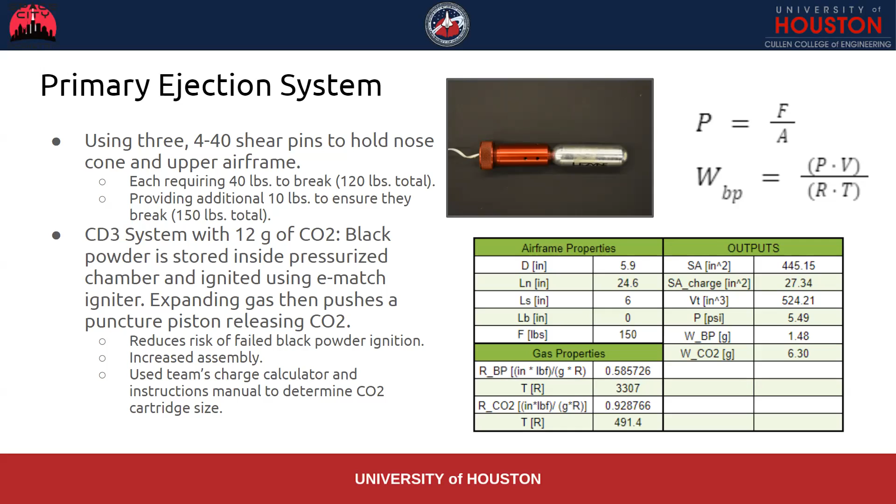Our secondary ejection system is a high altitude black powder charge. This was provided to us by Randy, so another big thanks to Randy for letting us know about this.

The way this works is we take black powder and place it inside a centrifuge tube, which is then compressed by wadding paper to the top and sealed with vinyl tape at the very top. At the bottom, there's an E-match that's epoxied in there so it doesn't come loose. The reason it's kept in this container is to provide a little bit of back pressure to ensure the black powder burns completely regardless of altitude.

It's really simple to assemble, and similarly we use the calculator to determine how much black powder to use based on our separation force, the geometric parameters of the rocket, and the gas properties of black powder. That gave us 1.48 grams of black powder required for separation.

For the tender descenders, the way they work is they allow redirection of the tension caused by the parachutes by cutting a connection. You can see in the bottom picture the whole assembly for it. The two quick links shown on top are held together by the retainer, and it all fits inside the housing. There's a bit of black powder and an E-match attached to the housing that, when ignited, pushes the retainer assembly out of the way, preventing the two quick links from being connected, which allows redirection of the tension by the parachutes. We have two of them, but only one needs to work for the main parachute to deploy.

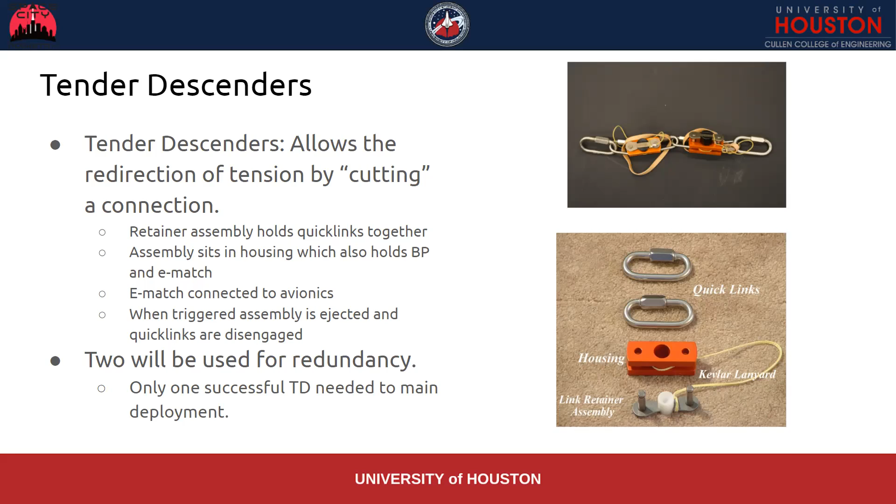So some of the specifications of the tender descenders: it's made from treated anodized aluminum. It has a 2,000 pound shock load and a 500 pound maximum release weight.

Some important notes about the tender descenders is that they will only undergo the impulse force by the drogue parachute. And because of the way that it works, as you can see in the first and second images, there is no overlap between the drogue and the main parachute.

To ensure that the E-matches are always connected to the flight computers, we will be using two different wires, one of them a little stronger, higher gauge, to make sure it doesn't twist as much. But whenever it is released, there's a built-in failure mode to ensure that it does disconnect the wires once the tender descenders are triggered.

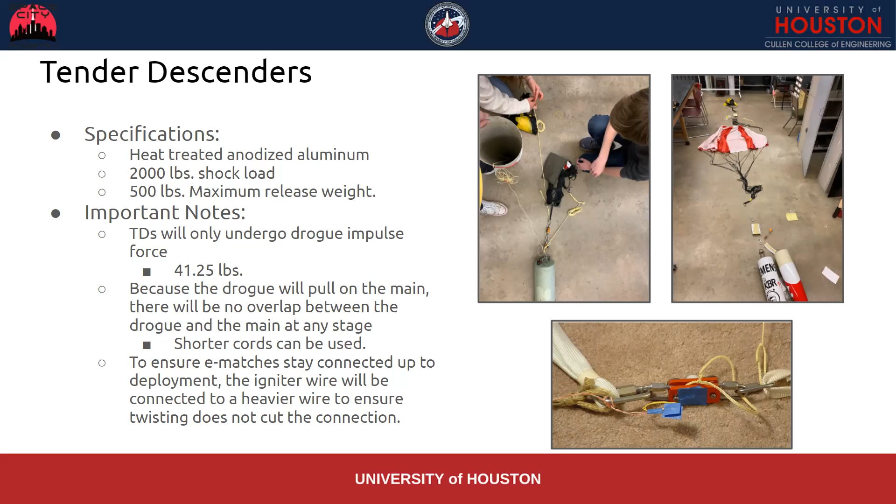Some other important notes about the tender descenders: we will be using rubber bands to make sure that the middle part is not lost in case both of them work. That's a little confusing, so I'm going to run through this example real quick.

In case one of the tender descenders works, the rubber band will tear. As you can see in the first row of pictures, if one of them works, the rubber band tears apart and all the parts are recovered.

In case both of them work, only one of the rubber bands will fail and the other one will not tear, and that would allow the two middle quick links to be saved. Lastly, the tender descenders will be covered with a Nomex blanket to prevent it from burning any other hardware.

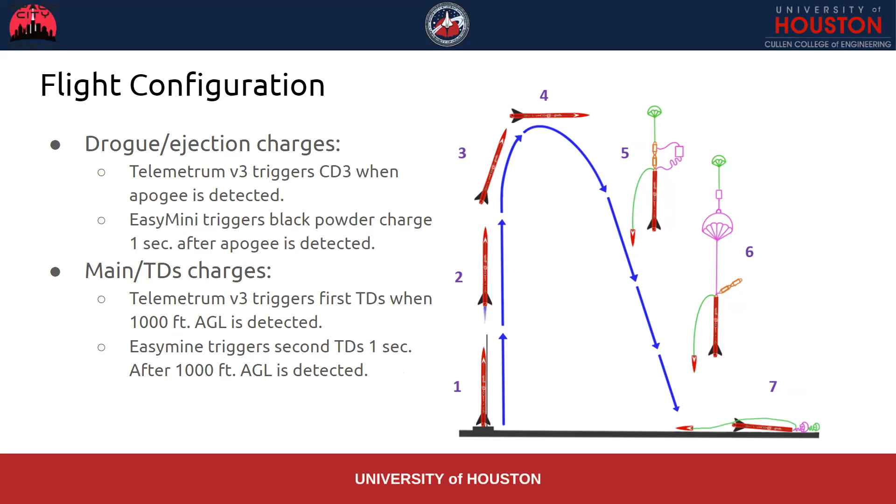So here's the flight configuration. The telemetrum is going to trigger the CD3 when apogee is detected, and then 1 second later the EasyMini triggers the black powder charge. Then for the main, the telemetrum triggers the first tender descender, and the second one is triggered a little bit after.

Just a little bit for next year, our whole goal is to make Zenith a lot more SRAD and have students research and develop subsystems. For structures, producing our own frames, making a new boat tail design that makes fin modularity a lot easier, and working with composites. For recovery, since we had a capstone team working on a mechanical separation system, trying to implement that.

For avionics, maybe reimagine the avionics tray and how we see avionics, utilizing more of that space we have, doing more with our SRAD sensors, and continuing to work with analysis to get experience with things like FEA, CFD, mathematical models, calculations, and so on.

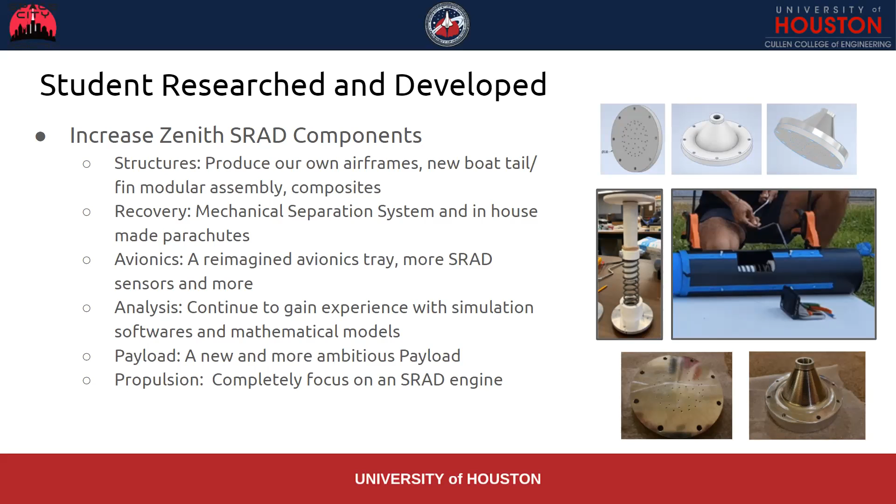For payload, I think next year it's time to make a brand new payload, maybe even more ambitious than we've had in the past. In the next few years, switching to an SRAD engine is what we want to do. Without a lot of funding it's hard, but I think we're in a really good position for next year to get that funding because we have the experience.

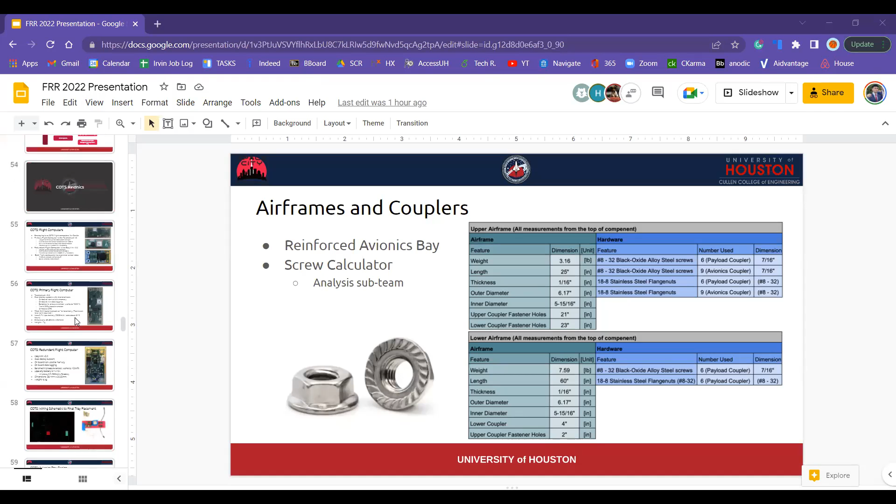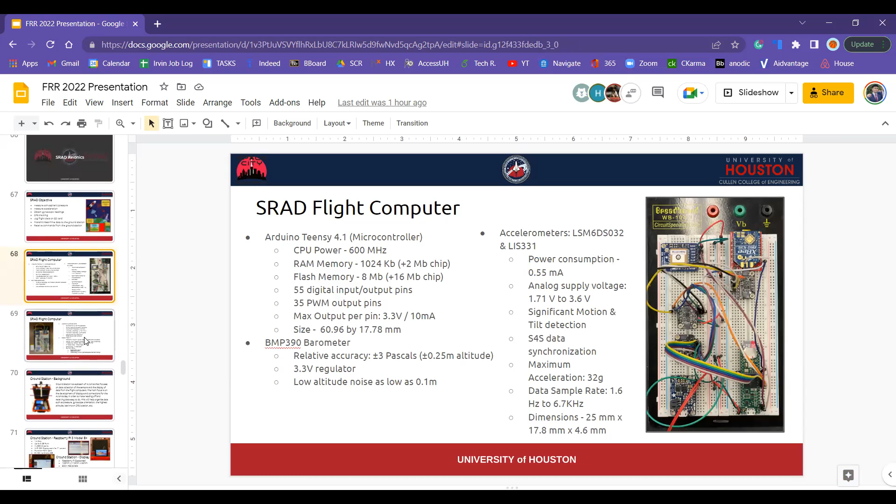Yeah, I mean it may just be a word usage. Are you talking about barometric pressure changes, actual pressure, flight pressures, or are you talking about accelerations, G's? When you were talking, it was on the biological payload. Payload slides. Yes, I'm sorry.

I was using acceleration forces and pressures interchangeably just because they're very closely related. Acceleration and pressure are both measured by the avionics sensors. We're looking at how accelerated forces affect E. coli as it would the human body. I understand that, and I understand acceleration can be turned into pressure, but they're not the same thing.

So you need to keep your nomenclature straight.

Okay, the next question is, why does the charging cable fall out of the plug? What is the mitigation? I guess the question is more, what is okay? So on your risk, you said it's improbable that the power cable can fall out. I have firsthand experience with that happening on a rocket, even after I thought I took great care to prevent that from happening. So what mitigation steps have you taken to ensure the plugs won't fall out?

The mitigation would be a charging lock. We have decided to either buy one or form one out of zip ties and wrap them around the cable as well as the power bank.

Okay, so that would have been the mitigation, but it's not improbable. It's likely. It happens all the time, and it's in between occasional and likely, depending on how often it happens.

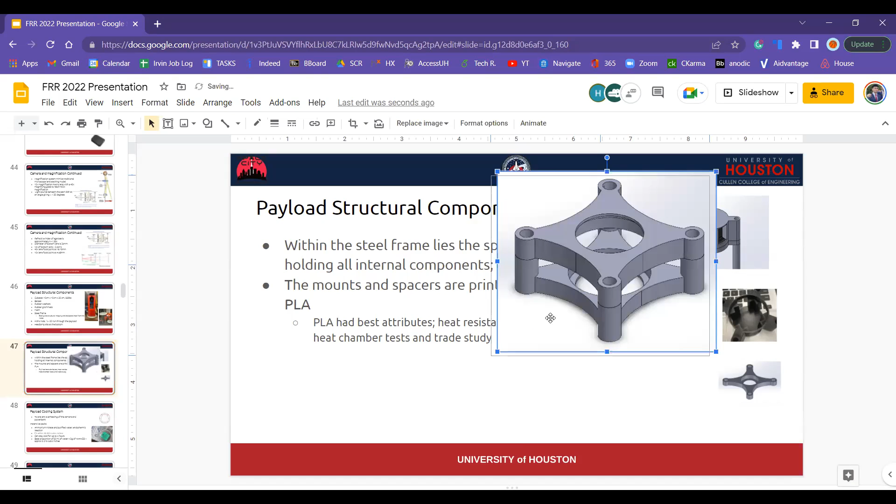So would you suggest, instead of having the 2 or 4 pillars that connect the two plates together, filling it in so that only the lens volume would not be filled in by the PLA, since there would be a lens in between those two plates? Yeah, that would certainly help. It's really hard to say without knowing your constraints on what you can do, but that would probably help as well, stiffening up those plates from bending. That's something you can throw into FEA and get some actual deformations that way.

Is that the thickness of the lens, the distance between that lower lip and the top of this piece? Yes. Okay.

Just to comment, I don't exactly know your constraints here, but be aware of the stiffness of this and make sure your optics aren't thrown off by flight loads.

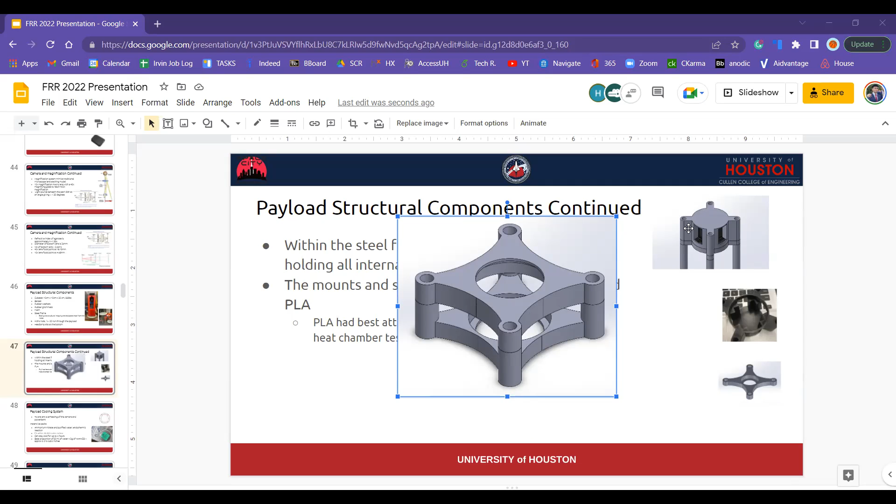I have a question about the picture on the top right. I don't know exactly what that is, but I see it's on like 4 long pieces, seems like 3D printed pieces. Do you plan on printing those, the legs underneath there, or is that going to be something else? So this was because we reused the mount for the GoPro and for the macro lens, that was just a screenshot from the CAD for that. Those 4 pillars won't be there because the distance between the macro lens and the 40 times lens will be much shorter, so they're practically stacked on top of each other. Gotcha, all right.

Any other questions on that? Yeah, I have a quick question. So I know y'all are going to keep a power bank plugged into the GoPro while it's flying, right? Have y'all checked to make sure you're able to actually open that little door to access the charge port for that enclosure, so the enclosure isn't going to get in the way of that? We have space on top of the mount for the GoPro that the power bank will be mounted to, and then the cord will feed through the space within the mount.

Okay cool, and then also, have y'all actually tried to capture any footage on the GoPro while having it charging? Yes, we have. We were running more battery capacity tests just because we got the newer GoPro this week. We ran it, and it was lasting up to 4 hours. With the power bank, expected with heat, it's to mitigate battery capacity failure. It's been running very well. Another mitigation we were thinking about is if video takes up too much power and overheats it too fast, we'll do a time lapse instead.

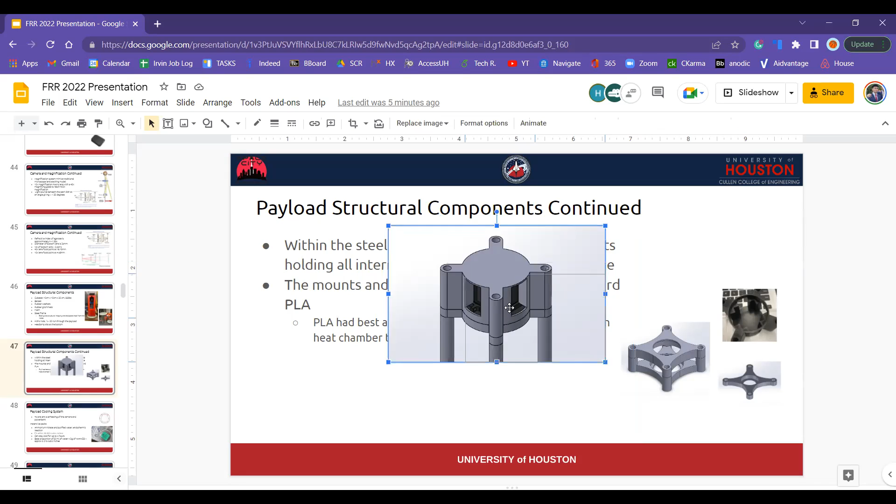I can touch on the vibrations question. No, we don't have any data. We have tried in the past to collect data on that, but it's all either been faulty data due to technical problems, or just not good data.

Gotcha. Maybe it's a question for Randy. Randy, have you noticed - I'm sure this data has been captured somewhere for generally high power rockets that go within certain Mach numbers along with altitudes. I'm sure that's in the sims. So if you go back through, your max sim number was 14 Gs.

Well, I guess what I'm referring to is not the axial load in terms of Gs, but vibration, what we commonly know as X and Y, to see if the camera can keep focus while being shaken around. Or do high power rockets sustain a lot of vibration in the X and Y axis?

Yes, they do. They have vibration, but we fly GoPros or lesser variants of those all the time, and for what we're doing, which is mostly wide angle, it's fine. You don't see any noticeable vibrating in the rocket. You may - with the way they're using it as a microscope, that's not something I've seen this application used for before. So rigidity is going to be important just to keep things aligned, as y'all questioned.

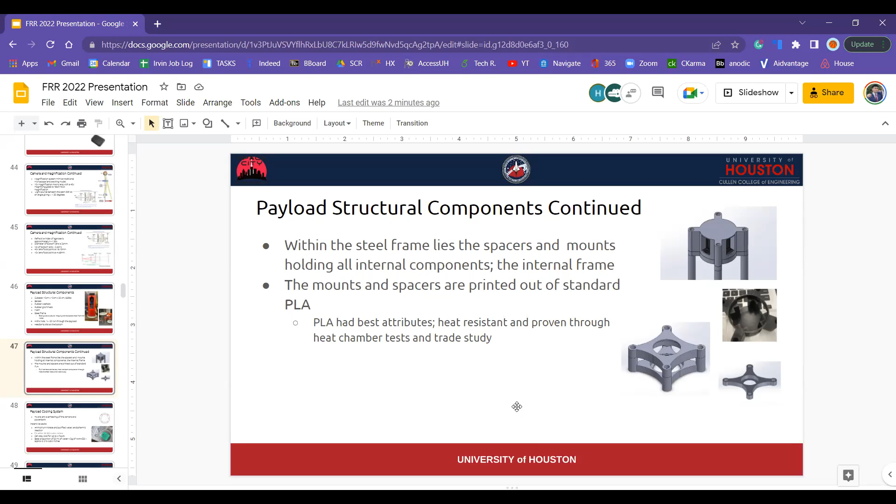Any more questions on payload? I have just one quick one. I know you mentioned you had included ballast on your payload. So just make sure you're still consistent with the rules - I can't remember exactly the percentages, but there's only a certain percentage of your total payload mass that's allowed to be ballast, right? I'm not sure if that's rules changed.

Okay, thanks. I had a really quick question about structures. Whenever you guys epoxy the fins, do y'all have some sort of plan on how you're gonna keep the fins perfectly aligned while they cure? Yes. So the plan is we already have the dimensions of the motor sleeve and the thickness of the fins, and we're gonna print two 3D guides to keep them straight with each other, and then we're going to do that fillet on them. We'll let it dry with the actual guides on it, then pull those guides away, and that's when we'll do the tip-to-tip layup.

Cool, that's perfect. That's exactly what I was gonna suggest, like some sort of 3D printed jig or something. So just making sure.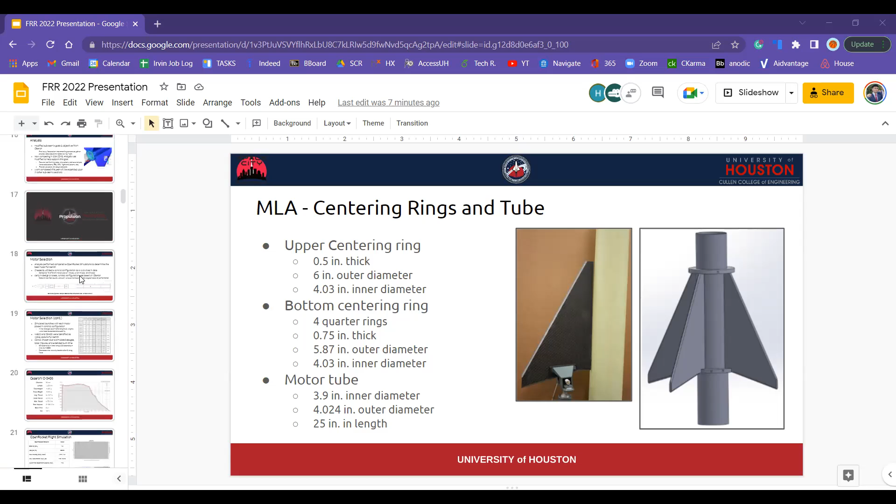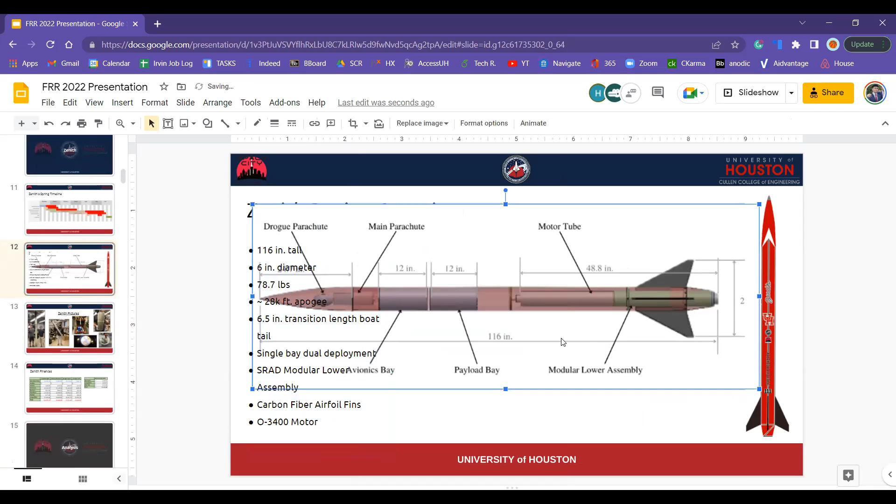Okay, I think there's some confusion here. Let's see if we can clarify, because it is confusing even when we're explaining it to our members. Can you pull up the overview? Yeah, so I'm going to right now. Let me see. Okay, so the way that this motor thrust and retention system would work is the motor we're using is an O3400, and it is using Cesaroni, I guess, 98 millimeter hardware.

But that's not relevant. Everything that's relevant is where the motor is attached. You have no motor retainer on the rear edge of the motor tube. It is important, and I'll explain why. The thrust ring on the motor is also the aft closure for the motor.

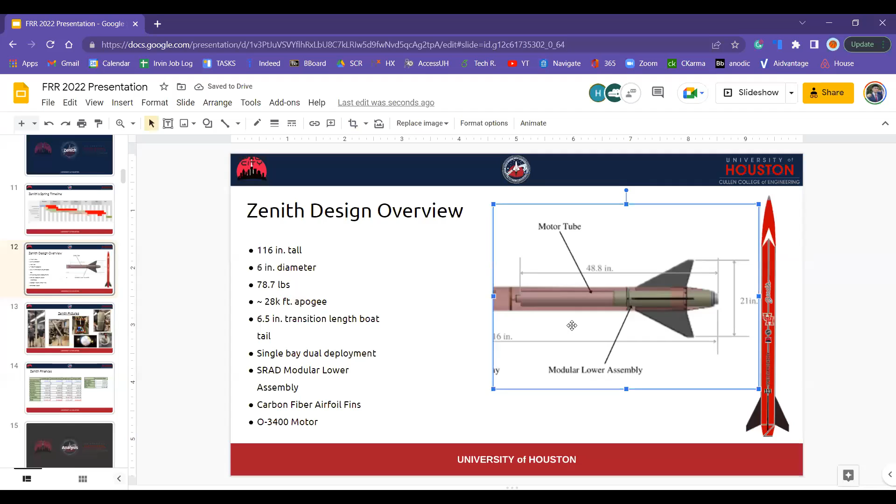And that is basically against the, it's like a sleeve around the motor tube, the motor piece. Right, but the front bulkhead will not be rigidly bolted to the plate up here at the front. Correct, the red plate. The forward closure for the Cesaroni motor will be bolted to the motor retainer at the top of the motor. Right. And so when you mount the motor inside of here, at the rear, you're going to sit there and twist the motor until it tightens down, you have it tight, right?

So you put a slight load onto the motor tube. But when it comes to all the thrust, when this motor expands due to thermal and pressure, because the front closure is not floating, it's in direct contact with that ring. That ring is taking all the load.

No, in fact, we're designing it such that there is a gap, a quarter inch gap, between the forward closure of the motor and the retaining ring. But the bolt's going to be rigidly attached. It's all going into the bolt. It's going to be rigidly attached in tension. So there's nothing supporting any thrust being transferred through to the motor retainer ring. It is just a through bolt that, once tightened down in tension, will apply to the motor. That's what your FEA shows.

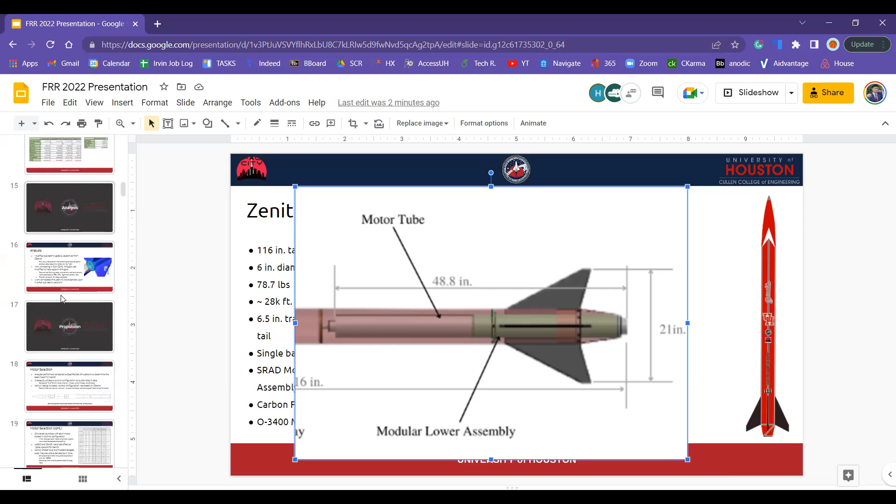For the MLA FEA, we didn't incorporate the top motor block into that analysis. You'll need to go back and redo it taking all of that into account. You've missed a major issue, a major part.

I think this is more of a visual thing, because there wouldn't be any load being transferred the way we have it designed. I apologize for not having a better figure on that. Yeah, I think we need to show you with more figures, since this isn't representing exactly how it's going to be distributed.

Okay, so if the rear closure is up against the motor tube tightly, and you have the bolt in tension, the question becomes, as the motor heats up, the casing expands linearly and grows in length. It also grows from the pressure. Since you've got it tied at 2 points, the only way it can move is either to push through the plate or push out the back.

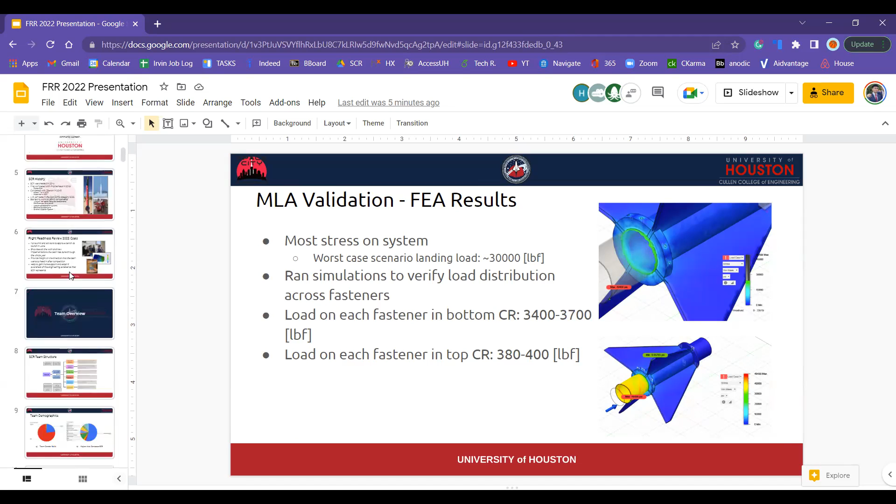You might also think about a lock wire at the top end. Actually no, because that's floating, so that might not be a good idea. Right, but if you double nut it with a lock washer between the two nuts on the forward side of the plate, and then up against the bulkhead you put a lock washer with a bolt that holds it to the plate, because that motor casing is an $800 item. And if you put thread lock in there, even if it's the blue, it's going to get hot enough that it could cause the thread lock to come loose.

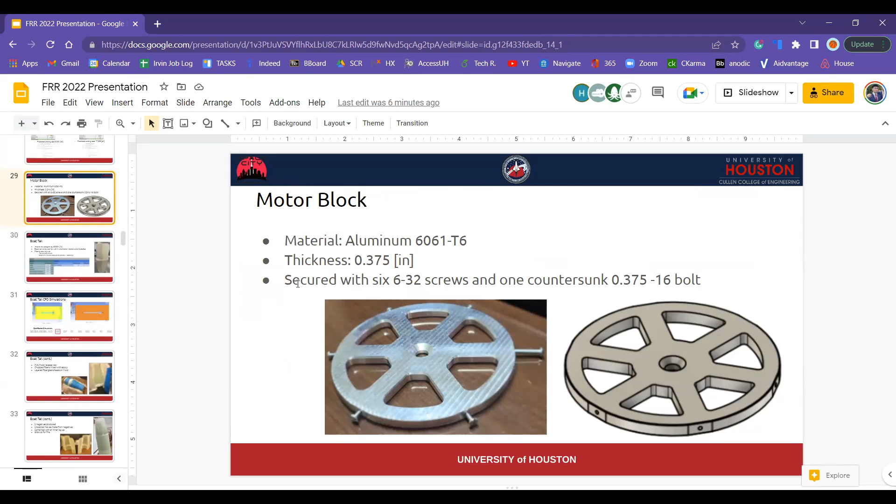So nothing wrong with the design, just you need to double nut and put lock washers in there. I guess you also might want to be careful. So if you're going to do that, you probably want to start preloading the nuts, the double nuts, instead of the bolt. Right, and you might start loading up the plate, which you don't want to do. Yeah, especially with that gap there.

Is there a reason y'all didn't just do bolts through the skin or something, just to have a shear joint there to keep it from moving? Well, if the motor rotates, it's not a big deal in reality. The only problem is unthreading.

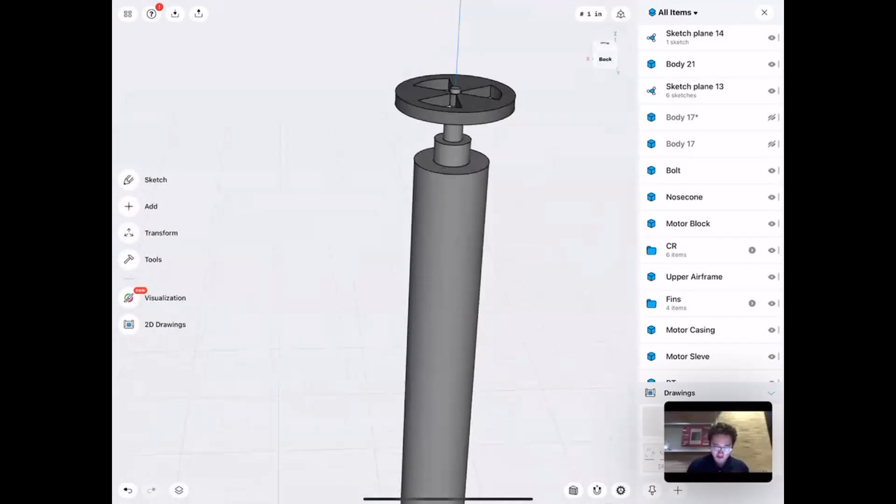Here is a CAD representation. This is a preliminary one, doesn't have all the detail involved, but as you can see this is just representative of that plate, and we have the bolt here. It's free to move forward, but obviously the bottom face of the bolt was what would be keeping it in place and retaining the motor.

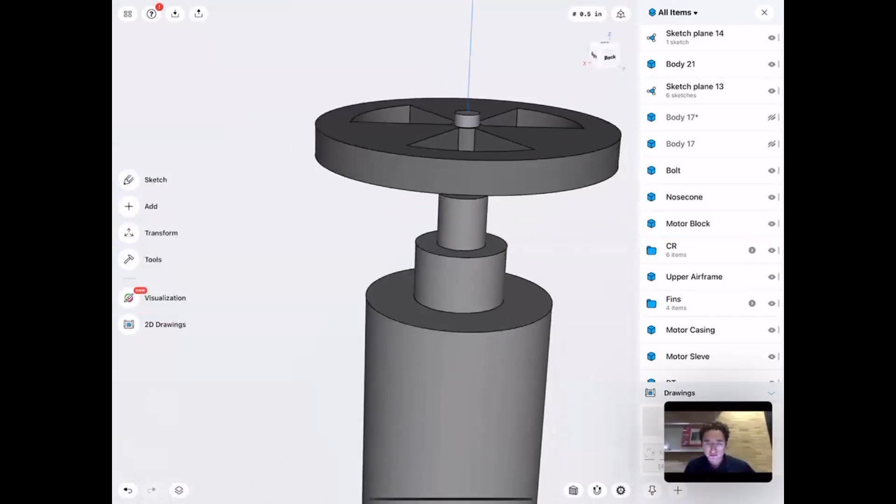Yeah, I think everyone's worried about that bolt coming loose from the motor. Correct. So put a lock washer and a bolt against the forward closure, and then double nut the top side with a lock washer, and you'll be fine. You don't think Loctite will help, Randy? You could use Loctite on the nuts, but if you do anything with Loctite blue you're going to have trouble getting it apart afterwards. And lock washers work fine, they've worked fine for a long time before thread lock came along. But on the forward closure you don't want to use Loctite, because if you gall up the threads in the forward closure, you can throw it away, and that's also $200 or $300 to replace.

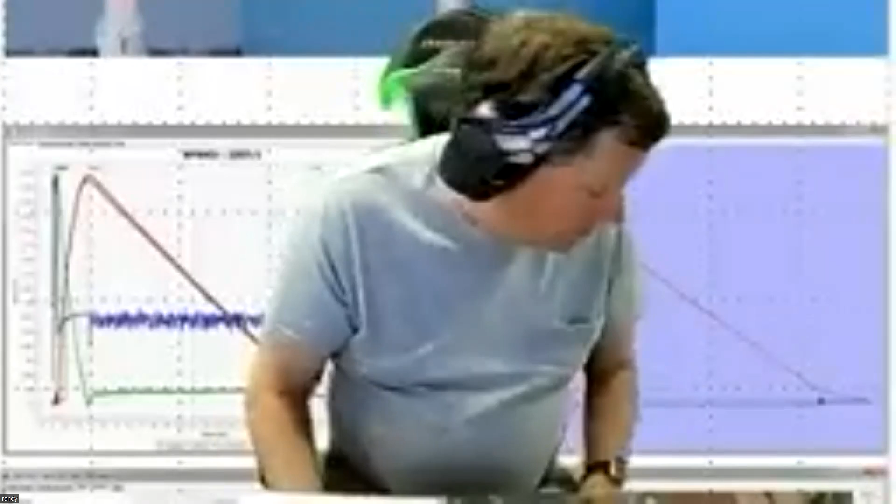Is that bolt also fully threaded or does it have a shank on it? Yeah, that I don't know. Sorry, I wasn't sure if I was muted or not. Fully threaded. Yeah, cool, okay. It might be, well maybe this is just a nitpick, but it might be worth doing if you're expecting it to slide like that. Maybe you want something a little smoother, like a shank bolt, especially if you're not going to use all those threads. Absolutely, yeah, we'll look into it. Good point.

I know we're kind of past our time already, but just to give my overall comments, I think y'all's analysis and validation this year is more thorough than ever, so I'm really happy about that. Y'all did a good job there. But in terms of flight readiness, I know y'all haven't gotten to this point yet because you're still finishing up the rocket, but I want to make sure you aren't neglecting the actual launch procedures. I want to make sure you have some sort of procedure in place for all the pre-launch stuff you have to do. Practice using that procedure in dry runs, and then make edits according to the issues you run into the first time, and practice it again until you've perfected your procedure, so you can almost mindlessly follow it without even having to think.